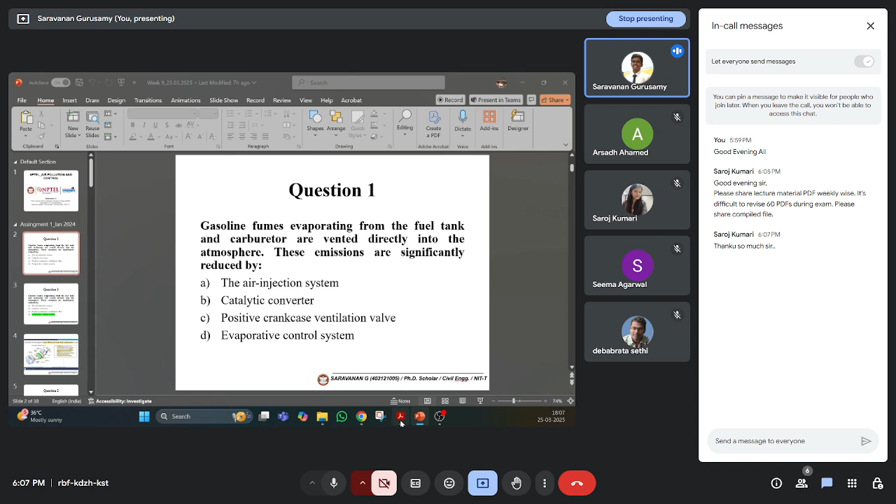So how to discuss this - air pollution control devices? I will just share the screen. Hope it's visible to you now. How to control air pollution?

Why is it called air pollution control, not air pollution treatment? Because air, it's a part of environmental engineering. In water and wastewater, we discuss treatment. But why is air pollution not treatment? Because the pollutants we discuss - carbon dioxide, carbon monoxide, nitrogen dioxide, sulfur dioxide - these are all part of air. So whenever a compound is part of something, we always try to control it; it will not be removed from the system. Once it is removed from the system, it is called treatment. Once the level is increased and we try to decrease it, that is called control.

We know air contains 78% nitrogen, 21% oxygen, and the remaining as trace gases. These trace gases contain CO2, CO, N2O, SO2 - everything - and N2 is already there at 78%. So if something increases above the limit reference level, we try to reduce it. That is called air pollution control - we are controlling it to the base level.

If something is present in excess that is not already an existing component, it needs to be removed from the system - like ozone, volatile organic compounds, or refrigerants, which we discussed last week. These are all non-existing air components that need to be removed - that is called treatment. But whenever talking about particulate matter, CO2, N2O - these need to be reduced, so that's called air pollution control. That's why this term air pollution control is very important.

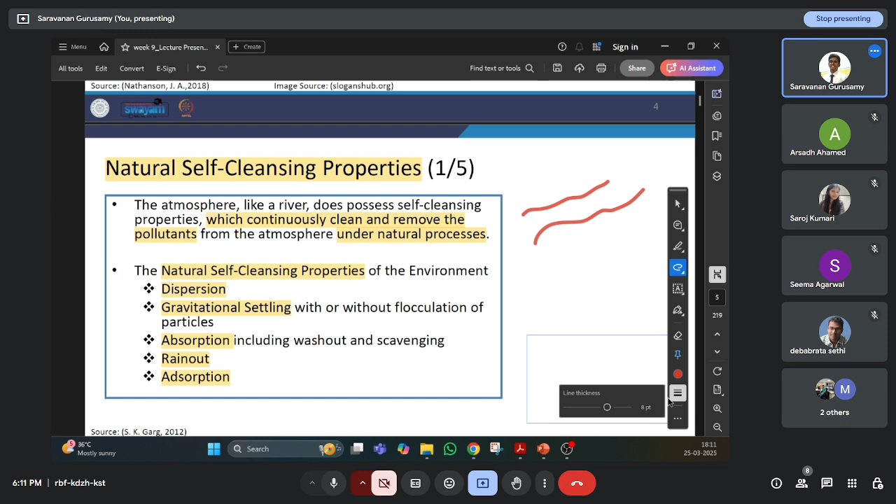Then there comes the natural self-cleansing mechanism. Consider a river - water is flowing, and an industry is discharging some effluent into the river. After some time, you can see the river becomes clean again. Why? Because of dispersion, dilution, adhesion - these mechanisms happening in flowing water reduce the pollutant concentration. That is called a self-cleansing mechanism, happening naturally because of the flow of the river.

The same thing happens with air, because air is flowing - it's also a fluid. It moves because of dilution, absorption, or gravitational settling. It may get dispersed, or settled due to gravity, or absorbed by water or liquid, or adsorbed onto solids, or rained out - because of rain it gets settled down. These are the five principal mechanisms by which pollutants in the atmosphere may get reduced naturally. That's called the natural self-cleansing property of air.

The first one is dispersion - dispersion of pollutant by wind, because whenever there is high wind, that creates a turbulent nature. We have discussed this in modeling also - there is a stable condition and an unstable condition.

Unstable condition is due to turbulence of wind. Whenever there is a high flow of wind, that will dilute all the concentration. If there is an industry emitting a pollutant, with proper wind it will be dispersed easily, and we won't find a high concentration of pollutant anywhere. But it does not remove the pollutant, that's the major thing. It will only disperse it, not remove it.

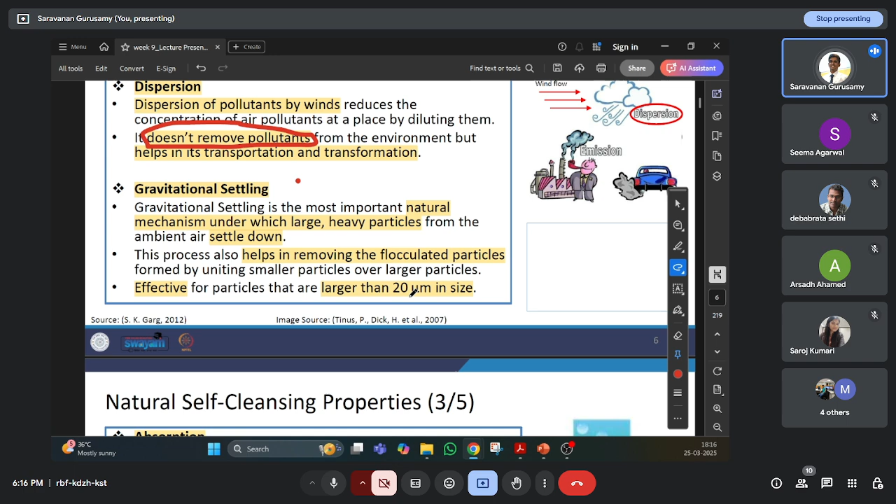Similarly, gravity settling happens whenever there is a particle of larger diameter, denser particles that will easily settle due to gravity. If you look at a desk or the floor, you may find particles deposited there due to gravity. That's called gravity settling. It effectively works when particle size is greater than 20 micrometers. Even 20 micron particles are considered larger particles, and they get settled easily.

Then absorption happens, as there are two principles we discussed earlier: absorption and adsorption. Absorption happens whenever a particle is mixed with a liquid. Adsorption happens whenever a particle gets adsorbed on the surface of a solid. Absorption happens with rain or mist, where a droplet of rain collects the dust particle in the air and it gets settled. This takes place below the cloud level. In clouds, there may be water droplet particles due to moisture; the particles mix with the liquid and settle down with the raindrops. This does not help in removing particles smaller than 1 micrometer in size.

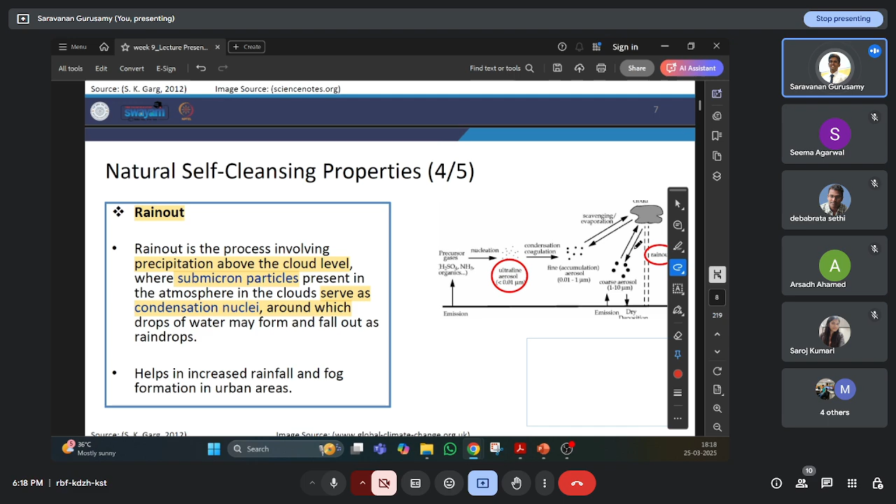Then rain out. Rain out happens involving precipitation above the cloud level, whereas absorption with mist or raindrop particles happens below cloud level. Rain out happens above the cloud level, where submicron particles present in the atmosphere in the cloud serve as a condensation nuclei, around which drops of water form and fall out as rain droplets. The particle gets surrounded by water particles through electrostatic attraction, called condensation nuclei, and then gets deposited as a raindrop.

Finally, adsorption, similar to absorption. Adsorption happens on the surface of a solid. It is kept attracted generally electrostatically by the surface due to charge, and then either by gravitational settling or by inertial impact it gets settled down.

So this is the natural cleansing strategy and their control devices. All the devices we use nowadays for air pollution control, we have learned from nature. Naturally there are mechanisms that we are adapting into mechanical devices. That's the principle behind it. So most control devices are based on the principle of this self-cleaning capacity.

Gravitational settlers, or settling chambers, are based on gravitational settling. Spray towers are based on the absorption principle. Wet scrubbers are techniques we will see, but the principle is adopted from nature. Use of activated carbon, silica gel, these are all based on adsorption, again the adsorption principle happening in nature. So these are all the principles we are using, adopted from nature.

So first, why do we need air pollution control? What's the objective? Prevention of nuisance, because there should not be a high concentration of pollutant in the atmosphere, and prevention of physical damage to property.

Elimination of health hazards, human health hazards. Then recovery of valuable waste products, because whatever particulate matter we are emitting may have some value. Whatever organic matter we are emitting into the atmosphere may have some value.

Then minimization of economic losses. As I mentioned, lots of tourism damage, visibility, and material damage to historically important areas - that will cause economic loss, like rubber. Even all the vehicle tires are getting affected due to air pollutants. So that is all economic loss to the country. Then improvement of product quality - these are all important objectives of air pollution control.

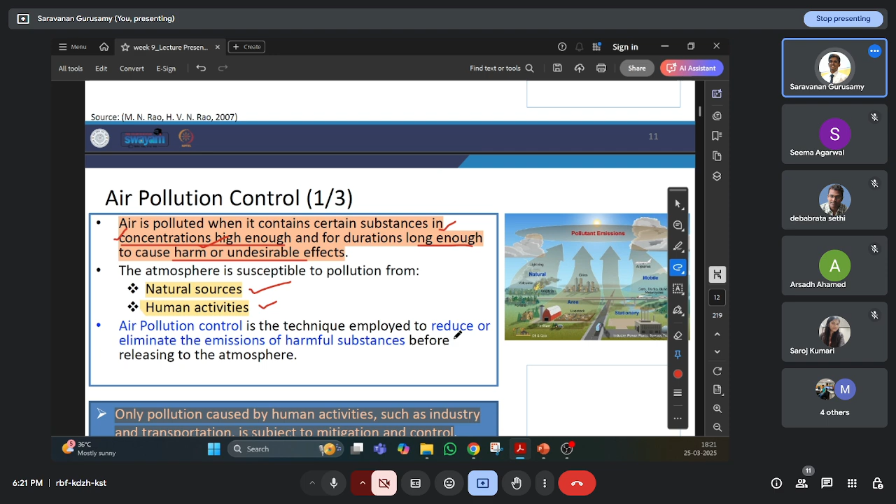So air pollution control is a technique to reduce or eliminate the emission of harmful substances before releasing to the atmosphere. This control is the strategy we need to adopt inside the industry or any source, before emitting into the atmosphere. If it gets emitted into the atmosphere, we can't do anything. So these are the two main principles: reduce before emission, control within the premises.

Only pollution caused by human activities such as industry and transportation is subjected to mitigation and control, because whatever is caused by nature can be self-cleansed by nature itself. So anthropogenic activity or anthropogenic sources need to be controlled.

So what are the pollutants we have to target to control? So primary focus is on criteria pollutants - there are 6 criteria pollutants which are prescribed in IS code also, I mean National Ambient Air Quality Standards, NAAQ standards. So that also prescribed 6 criteria pollutants.

First is particulate matter, both PM 2.5 and PM 10, based on size, aerodynamic particle diameter. Then carbon monoxide, sulfur dioxide, nitrogen dioxide, ozone, lead. These are the 6 criteria pollutants having proper standards, need to be within the standards.

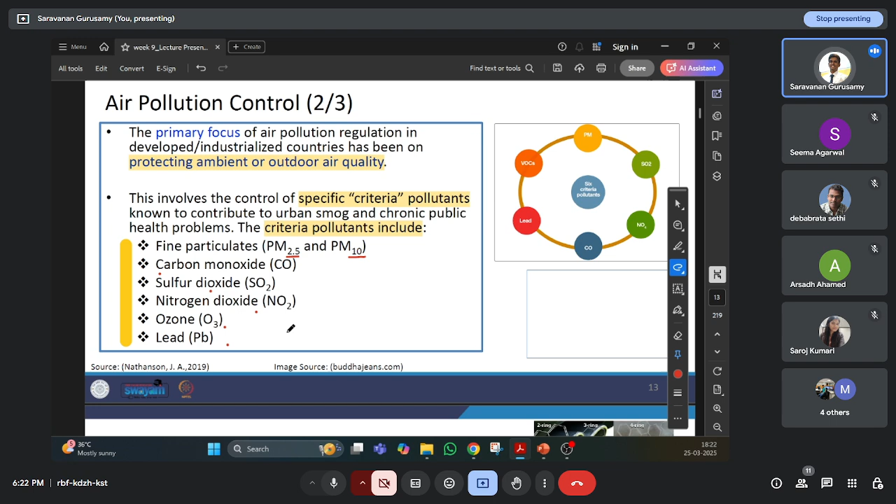Why are they called criteria pollutants? Because whenever this pollutant is present even in small quantity, it itself causes huge damage to people or health effects. So since the end of the 20th century, the hazardous effect of trace amounts of many other pollutants, called air toxins, became known - these are all man-made compounds. After the 20th century, we could see other than these 6, lots of air toxins getting emitted into the atmosphere, like organic chemicals.

So now we are discussing - we have a code for VOCs, volatile organic compounds, carbon, hydrogen, and other atoms that may form organic chemicals. Specific emission regulations have been implemented for this pollution also.

So how to control? As I mentioned, these 4 are viable: reduction at the source, reduction of pollution discharge at the source, dilution of source discharge, dispersion of source location. So these 4 are important. How to do this?

Reduction at the source is - once it is not getting generated, then no need to emit, right? So if you have a good technology - like I am having a vehicle that is very old and will emit lot of pollution to the atmosphere. So that is one. Another one is an e-vehicle that is not having any emission. So I am reducing at the source itself by buying an electrical vehicle. So that is reduction at the source.

Then reduction of pollution discharge at the source by control equipment. If I am having only a diesel vehicle or a petrol vehicle or a fuel vehicle, so for that I'm having a proper control system at the exhaust that may prevent the release of toxins into the atmosphere. That is called reduction at the pollution discharge itself.

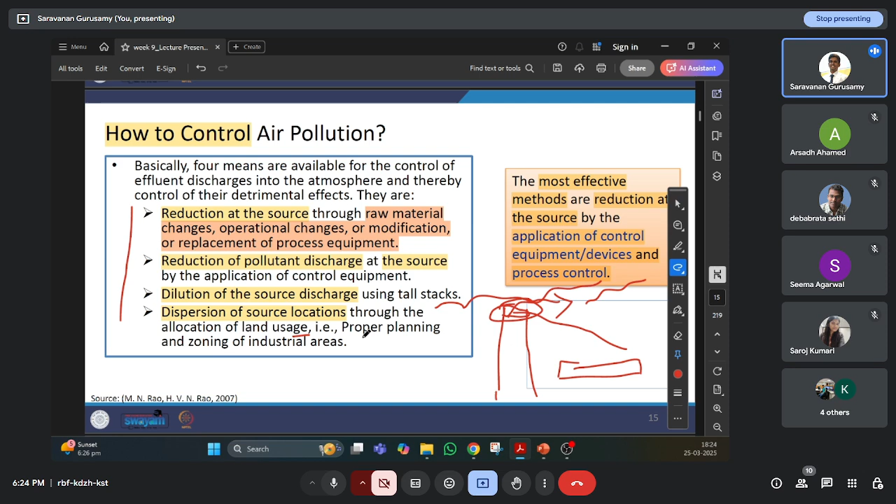These 4 need to be carried out before controlling, before thinking about air pollution control. So what are the devices or methods we can use? Emission can be reduced by changing to cleaner fuels and processes - from transportation or any industrial sector. Fuels are the reason for emissions, so cleaner fuels, that's what we call green chemistry. Green chemistry concepts are based on reducing waste or emission at the source itself.

Because those from environmental engineering background will know, for a simple COD test in water - chemical oxygen demand - we used to use lots of chemicals. For open reflux, how much chemical do we use? For closed reflux, how much time and chemicals do we use? So this process is getting changed. Nowadays sensors are there, and sensors don't require any chemicals. That's called cleaner production or cleaner green chemistry concepts. So if we shift industries' fuel concepts like this to cleaner fuels, there won't be emissions. That needs to be taken care of first.

Then if it can't be changed, emission control at the source needs to be addressed - collected and trapped by appropriate air cleansing devices for particulate matter control. There are two sources: stationary source and moving source. Moving sources are vehicles - cars, whatever exhaust we emit, that is called moving source. Stationary sources are industries, landfills - these are all called stationary source or area source. So how to control particulate matter from the stationary source?

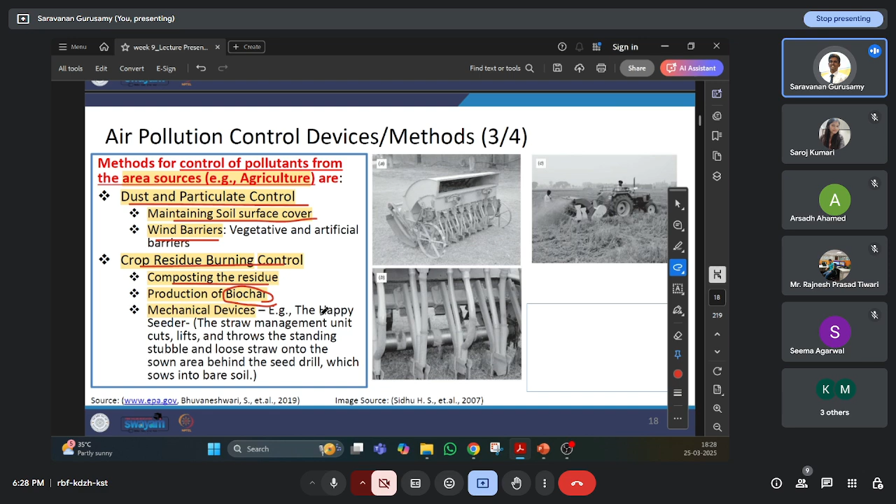Then production of biochar we can do - we can think about pyrolysis. Pyrolysis produces biochar in a controlled environment without oxygen at high temperature, but it is energy intensive, though we can get a product out of it. Then mechanical devices we can use like happy seeder, the straw management unit. There are lots of inventions now coming out to reduce crop residues or make value-added products from crop residues. So we need to think about control of pollutants in areas like agriculture.

Then forest fire, that is also considered an area source. How to control forest fire? It will emit lots of particulate matter, so firefighting reservoirs need to be there.

Spraying of fire retardants, forest fire monitoring towers need to be there, like watchdogs. And from a stationary source, as I mentioned, six equipments we are going to see.

Variety of physical processes, nothing is chemical here. Everything is physical because particulate matter involves no chemical reaction. Nothing will happen with the particulate matter. We have to settle or trap the particulate matter by size separation only.

So in air, there will be some particles. Air may pass through smaller holes, so we have to trap the particulate matter. That's the only physical method we can use.

If it is organic matter, nitrogen, or sulfur, then we have to think about chemical process. Particulate matter only requires physical process. Please remember this - particulate matter is a particle, a solid, so we can think about physical process.

So particulates adhere to each other, forming agglomerates. Whenever there is a bigger size of particle, it is easy to remove, easy to settle. We know that in a self-cleansing mechanism, particles greater than 20 micron in size directly settle on their own. So particles, when they adhere, cluster or agglomerates will be formed.

So first is settling chamber or cyclone collectors. All are discussed here in a single slide. Everything is discussed here for a stationary source.

For example, settling chambers and cyclone separators are used to control industrial dust emissions. As a pre-cleaner, we can use this type of settling chamber because these settling chambers and cyclone collectors are efficient for larger size particles only. So we can use them as a pre-cleansing technology.

Wet scrubbers are good for smaller particles, to control flammable, explosive dust or mist from sources. Wet scrubbers can also handle hot air streams and sticky particles.

Electrostatic precipitators, we can think about for power plants having minute particles. Coal power plant or thermal power plant will produce fine particle emissions in the flue gas. That needs to be controlled with the electrostatic precipitator, and fabric filters are also capable of handling fine particulate matter.

How to select these particulate collector devices? Based on the particle size, shape, density, and based on the particulate loading - how much quantity is there. For bigger quantity of larger size, we can think about gravity settling or cyclone separator.

For fine particles with lesser concentration, we can think about electrostatic precipitators or fabric filters, because we can't clean this type of fabric filter often. So that is also important.

Efficiency required - if only 90% removal is fine, then gravity settlers are fine. If 99.9% removal is required, think about electrostatic precipitator. Then properties of the carrier gas.

If it is hot gas, then we can't go with the fabric filter - it will burn. So that needs to be considered. What is the temperature of the gas? What is the pressure? What is the humidity?

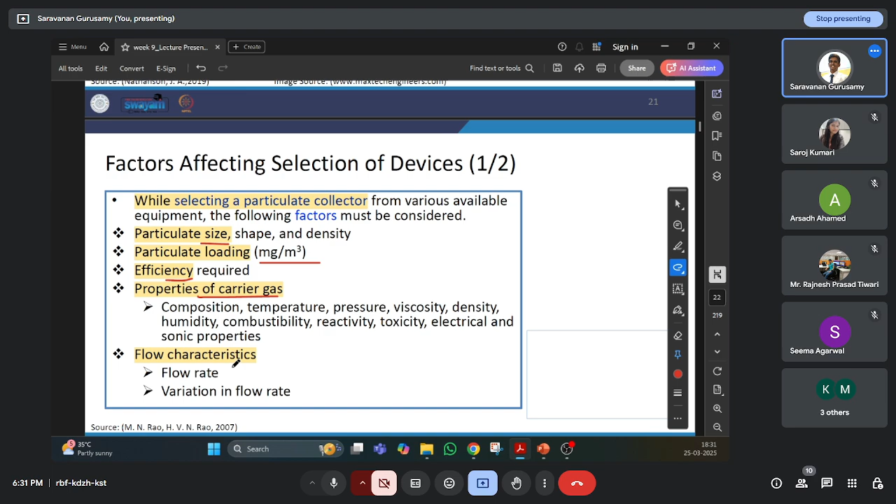If it is having water or moisture, then gravity settler will not work. So that and all needs to be taken care of. Then flow characteristics, flow rate, variation in the flow rate, specific properties of the contaminant.

Maybe the contaminant is toxic or corrosive, so we can't use a steel chamber that will get corroded. And allowable pressure drop - because in fabric filters it's flowing through minute pores, so pressure drop, pressure difference plays a major role. Then contaminant disposal after collection, what we are going to do.

If it is a wet scrubber, it will be taken with the water, so what to do with the water, how to treat that water with the pollutant. So contaminant disposal is a major factor. Capital and operating cost, ease of maintenance need to be thought about.

Then for gaseous criteria pollutants, we can think of three methods. First is for particulate matter, this is for gaseous pollutants like volatile organic compounds. Absorption, adsorption, incineration - these are the three techniques we can use for gaseous pollutants.

Techniques like singly or in combination of adsorption and incineration also we can think about. In coal mines, this type of extraction and utilization is used a lot. After production, lots of emission happens that needs to be taken care of with adsorption and incineration.

So fourth technique is called carbon sequestration. Nowadays lots of research is going on in carbon sequestration to reduce the carbon footprint. There is a 13th SDG goal, climate action - that is the main sustainable development goal.

Carbon sequestration comes under that. Whenever carbon is there in the atmosphere, it will really contribute to global warming, which we discussed last week.

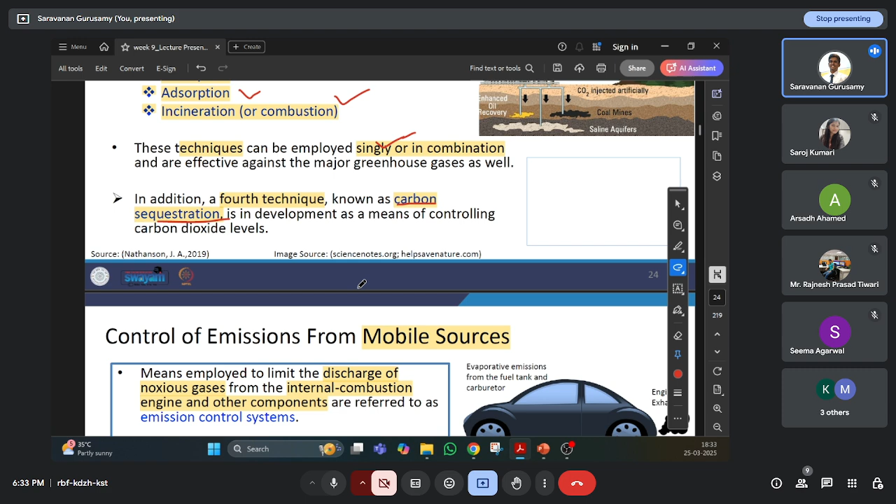So whenever carbon is sequestrated in solid form or contained in a system, there is no problem with global warming. That automatically reduces the temperature and the impact on the globe. So carbon sequestration is a major research topic nowadays.

For mobile sources, we can think about three main sources: engine exhaust, crankcase, and fuel tank and carburetor. These are the three emission sources, meaning the means employed to limit the discharge of noxious gas from internal combustion engines and other components. That's called the emission control system for mobile sources.

We have discussed the stationary source and the area source. Now mobile source. First is engine exhaust, right?

Engine exhaust may contain hydrocarbons because it's from petrol or diesel, so that may be directly converted into hydrocarbon. Nitrates, oxides of nitrogen and sulfates will come, so NOx, SOx will be there. Trace various acids, alcohols, and phenols may also happen.

Then crankcase. Crankcase is the housing of the crankshaft in the reciprocating internal combustion engine. Those from a mechanical background may know about the crankshaft. These are all engine components.

The crankcase is a secondary source of unburnt hydrocarbon. Whatever is burnt comes out through the exhaust; whatever is unburnt will be there as carbon monoxide. Whenever carbon is fully oxidized, you get carbon dioxide. Whenever there is a lack of oxygen, only CO will be formed - that is called incomplete combustion. With proper oxygen, carbon dioxide will form, which is good. So carbon monoxide is more harmful than carbon dioxide.

Then the fuel tank and carburetor - hydrocarbon continuously evaporates from the gasoline constituent, since it's a volatile substance. Diesel or any fuel is volatile, so it will continuously evaporate, forming gasoline constituents, and hydrocarbons will be there in gaseous form.

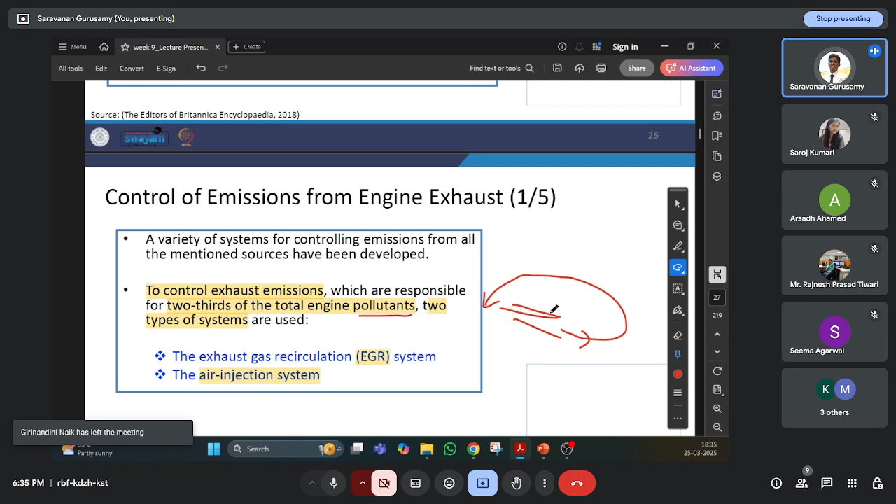One is exhaust gas recirculation, and the other is air injection system. Whatever gas coming out through the exhaust has good heat and may contain NOx, SOx, hydrocarbons - that needs to be sent back to be fully combusted and then sent out, so you get less pollutant output. That is called exhaust gas recirculation. Then the air injection system - air is injected for proper combustion. So these are the two systems we can follow.

For exhaust gas recirculation: there is an engine producing gas, and that gas needs to be recirculated again for full combustion before emitting into the atmosphere. A specific portion of exhaust gas is directed back to the cylinder head, which favors lower production of nitrogen oxides, because if it is fully oxidized, there won't be much emission.

Then the air injection system - secondary injection of air helps achieve full combustion by injecting air into the exhaust manifold. The air combines with unburnt hydrocarbon and unburnt carbon monoxide. Carbon monoxide at high temperature continues the combustion process, so CO2 will be released, not CO. These are the two control mechanisms for engine exhaust.

Another area of additional combustion control is the catalytic converter. What are catalysts? Catalysts are substances that boost a reaction but take part in it without reducing their own concentration - they go into the reaction and come out after the reaction. That's called a catalyst, and it boosts the reaction.

We need more oxygen or more oxidized product in the fuel, so we can use metal catalysts - hence the catalytic converter. It's a honeycomb structure coated with a thin layer of metals like platinum or palladium, which act as catalysts. These metals induce hydrocarbon, carbon monoxide, and nitrogen oxides to convert into water vapor, speeding up the combustion process.

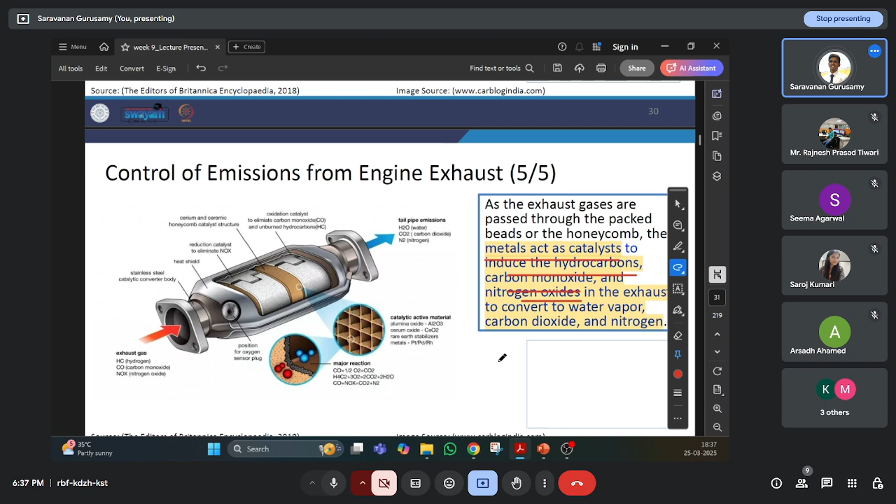With less oxygen itself, the reaction will speed up with high heat. But we can't give full heat, we can't give full oxygen. So with that limited purpose itself, a catalyst will help enhance the process. That's the use of catalyst. So metal catalysts can be used.

Then crankcase - first is exhaust, second is crankcase. That's the up and down part in the engine, so from there also some incomplete combustion products come out. That can be controlled by proper ventilating air and returned to the intake manifold. We need to add air, and the recirculation system will make it combust fully. So the positive crankcase ventilation valve, or PCV valve, can be used.

Earlier it was directly emitted into the atmosphere. Nowadays we have proper evaporative emission control systems in place with the fuel tank and also with carburetors, so that can be easily controlled. The fuel vapor is channeled through a purge valve, and the computer-controlled fuel injection system ensures a more precise air-fuel mixture, which is mixed and used for combustion, lowering the generation of pollutants.

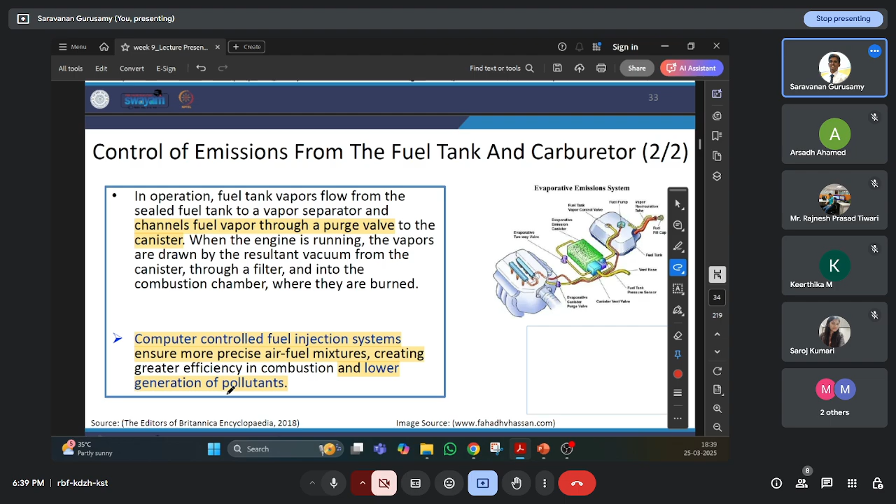So this gives you the proper idea about control of particulate matter from the stationary source, as well as from the moving source and the area source. Also volatile organic compounds may be emitted from the moving source - there are three emission pathways: one from the exhaust, one from the carburetor and fuel tank, and the third from the crankcase. Those devices are the control mechanisms we have discussed.

Selection of control mechanism is based on different factors, and the natural self-cleansing property is the base for this control system. We have adapted the principles from those natural cleansing properties.

Now we are going to discuss particulate matter control, or particulate pollutant control devices. The most effective method - this point will come in all the PPTs - is reduction at the source. So from an industry, we need equipment to remove or control the pollutant. We need to control at the source itself.

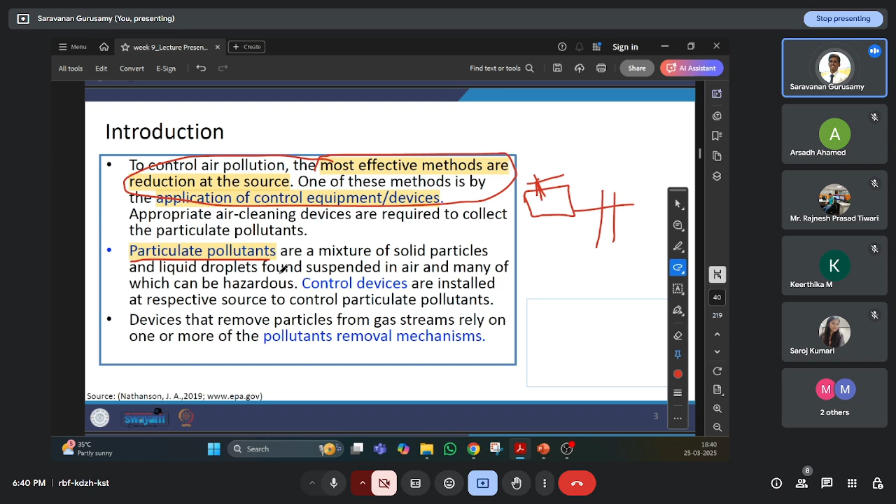Particulate matter is the main pollutant, a mixture of solid particles and liquid droplets, that can be controlled by different mechanisms. These are mechanisms, not devices - I'm discussing the mechanism behind those devices. First is gravity settling: as we know, a particle with higher density or higher mass will settle directly by gravity.

Second is centrifugal impaction. As you know, if you tie a stone to a thread and swing it in your hand, the stone will go around - that's due to centrifugal force. Whenever there is weight, it will always try to go around in a circular path. So we force the air to go in a circular path so that the higher-weight particles, like particulate matter, attach to the surface and only the air goes out. We are using the mass to remove the pollutant - mass will have a centrifugal impact.

The third one is direct interception. Whenever there is a barrier and air is flowing through it, the air may find a different path to go out, but particulate matter cannot find a different path - it will stick to that barrier. That is called impaction or interception, so direct interception may happen.

Then electrostatic attraction: whenever the particle has a charge and the barrier has an opposite charge, they get attracted. Subjected to the electrical field, the particle migrates to one of the surfaces of the device - this is called electrostatic attraction.

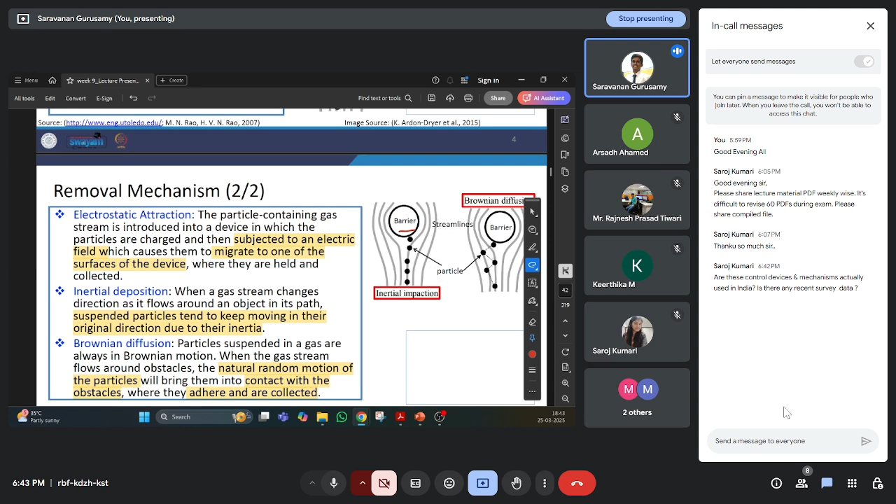Maybe some micro scale or mini scale industries operating in interior parts of SIPCOT may not have this type of facility, maybe having less fund or manual operating systems, so there we may not find this type of equipment. But major industries should follow - I mean all industries should follow, but major industries are using this kind of equipment.

So those are all the principles behind it. I am going to discuss about the equipment also. Hope I answered your question.

So we have discussed about gravity settling, centrifugal impaction, direct interception, and electrostatic attraction which is based on charge, and inertial deposition.

You all know every particle has an inertia, like what we experience in a bus - whenever the bus brakes, we move forward. So we are in a system moving in a path; whenever the system stops, all the particles will not stop. Everything has an inertia that keeps it in motion. So particulate matter in air may have the same inertia. Whenever there is a barrier, the air may go out, but the particles will intercept - inertially, it will impact and settle down.

Then Brownian motion - particles will always move in Brownian motion. This is a school level concept; we all know whenever particles are in a fluid, they will be in Brownian movement. That will cause the particulate matter to attach to the barrier. So we have to have a barrier to remove this type of particulate matter. These are all the principles or mechanisms behind it.

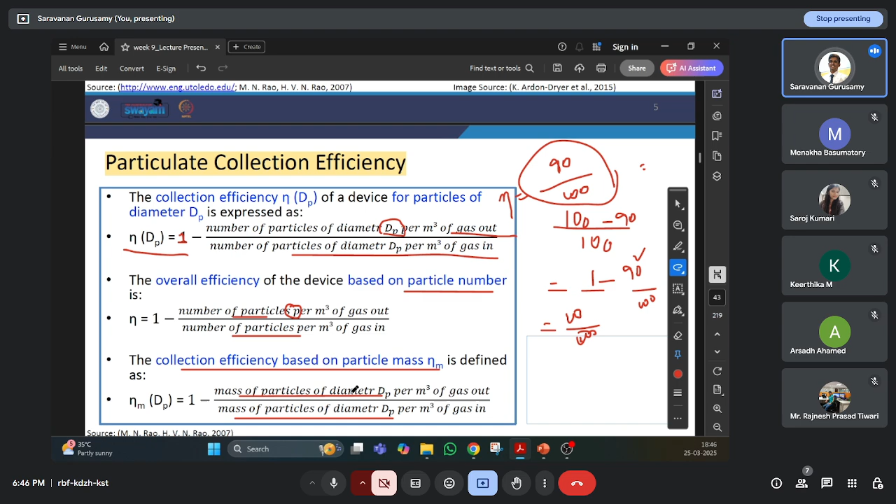So type of control systems - we'll discuss three here: settling chambers, inertial separator, cyclone separator. Next lecture we will discuss filters, electrostatic precipitators, and scrubbers or wet collectors. Six are the major particulate matter control devices. Settling chamber works with gravity, inertial separators work with the inertial principle, cyclones work with centrifugal force, filters work based on physical separation by barriers, and electrostatic precipitators work based on charge.

Scrubbers and wet collectors are based on state change, like water absorption. So particulate matter will get absorbed by the liquid particles. So these are the six principles and six devices.

First is settling chamber. So this is a simple type of equipment. Air is going in with a velocity slower than the settling velocity. Every particle will have a settling velocity. Those from civil background may know that if a solid is coming in water, it will get settled in the tank before leaving.

That's called a sedimentation tank or primary settling tank in environmental engineering. Water will be going in, and once it is flowing, the flow velocity should be less than the settling velocity. Settling velocity is given by Stokes law, Vs has a formula for settling velocity. We know the actual flow velocity, so flow velocity should be less than the settling velocity for the particle to get settled.

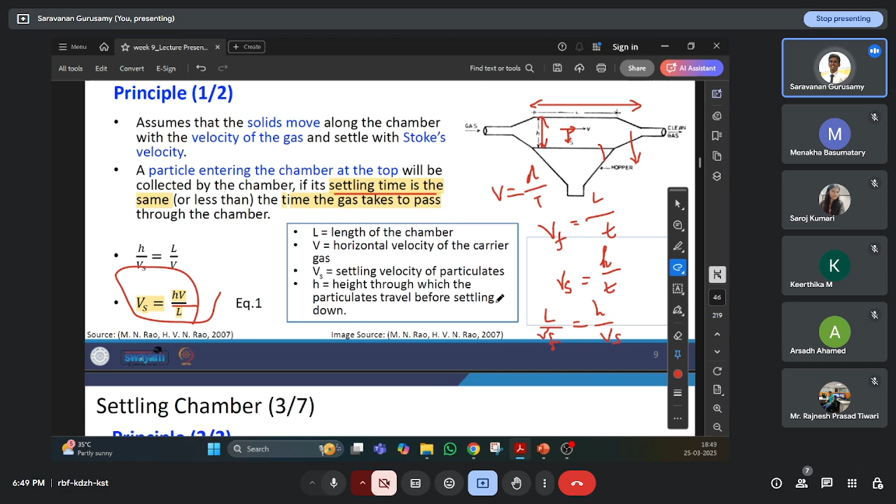So horizontal flow, this is vertical flow, that is the settling velocity. Settling velocity Vs equals Gd squared by 18 mu, times density of the particle and density of the fluid, which is the air. So the diameter of the particle you can find from this. D is the diameter, G is gravity, the acceleration due to gravity 9.81, and mu is the dynamic viscosity of the fluid. So you can find D from the settling velocity formula - this is the diameter of the particle that will get settled before the air gets out of the system.

So the minimum size of the particle that can be removed in the settling chamber you can find here - if it's flowing at this velocity or settling at this velocity, and given the length of the chamber, you may know my chamber will remove this particle size, this diameter. That's the formula behind it - it's a simple formula, Vs formula. If you know these values, you can find it all. Please study Stokes law.

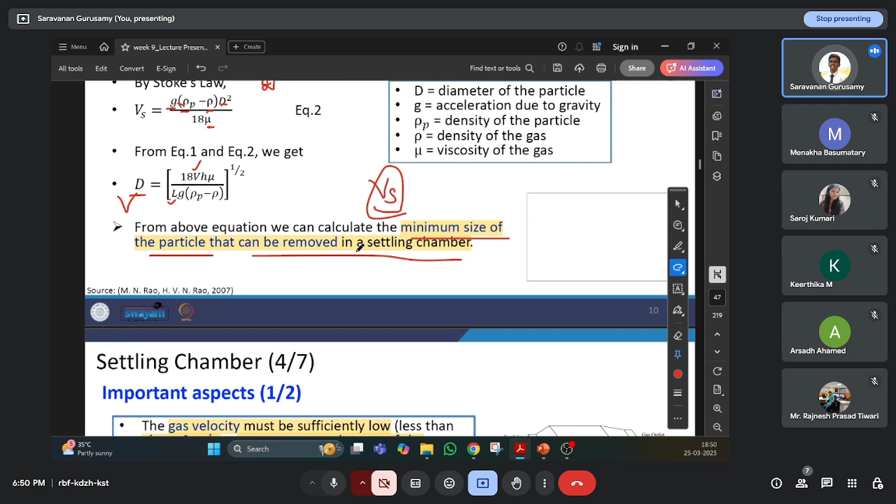That's in water, but the same can be adapted for air also. An important aspect is the gas velocity should always be lower than 3 meters per second to prevent re-entrainment of the settled particles. If it's higher than 3 meters per second, whatever particle gets settled, due to turbulence it will again come into the system. This is a main practical aspect - it should be less than 3 meters per second, and less than 0.5 meters per second is very good.

So to minimize turbulence, uniform velocity needs to be maintained, and pressure drop needs to be adjusted - it should be very small. Efficiency is improved by reducing the height traveled by the particle - that's why we call them tube settlers. If the gas goes through tubes, the height H will be much lower, and particles will get easily settled at the bottom. That's called a tube settler. Water treatment also nowadays uses tube settlers instead of a tank - the path will be more.

So easily it will get settled. That's what horizontal trays, shelves now they are using. The same principle is adapted for air also.

1 to 3 centimeter height intervals, and increasing the efficiency by increasing insertion of horizontal trays. If there are lots of horizontal trays, then air should go through this much distance, so L will be more. Particles will easily settle here, here, here - more pathways we can have to travel, so before that it will settle for sure.

Then minimal particle size we can remove is 10 micrometer.

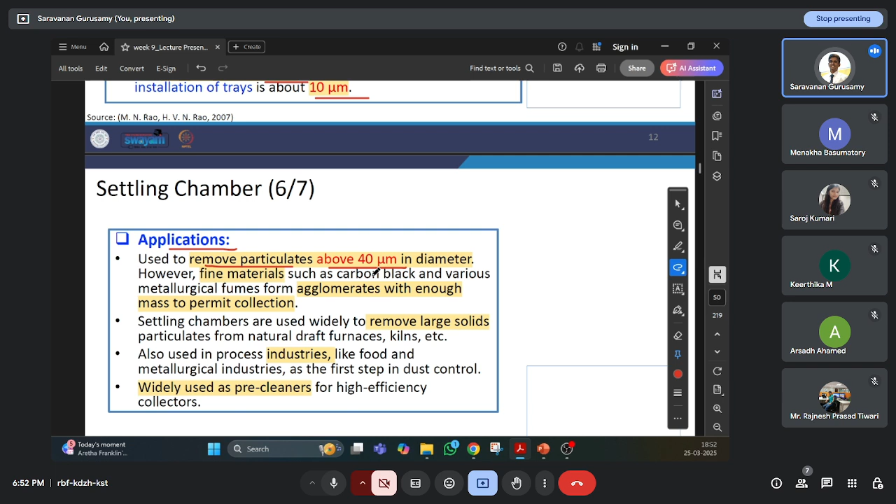What are the applications we can use for settling chambers? As you asked, you can see here. So the remove particle size above 40 micrometer. So wherever you can find 40 micrometer above particle, or else anywhere, you can use the settling chamber as a pre-treatment option. We first treat the 40 micrometer, then smaller particles we can use some other equipment that will reduce your cost and increase the efficiency.

Like remove larger solids from the draft furnace, kilns, cement kilns, or industries like food and metallurgical industries like steel manufacturing, or anywhere you can find these settling chambers.

First step is dust control. All the industries will follow this one. Dust control is very important, and it is widely used as a pre-cleaner. As I mentioned, we can use it as a pre-treatment option before any other equipment.

The advantages: low cost, simple, low maintenance, low pressure drop, dry. There is no need of water here, and it's easy to construct. Temperature is not a problem here.

Disadvantages: it will take larger space because it's a big equipment, and relatively low particulate matter collection. As I mentioned, only above 40 micrometer can be removed, and the efficiency is only 90% or 80% or 85%. It's a very low efficiency.

Then trays in multiple tray settling chambers may warp during high temperature. So if you are increasing the efficiency by increasing lots of trays, it will warp due to high temperature, so it will stick together. That's the problem here.

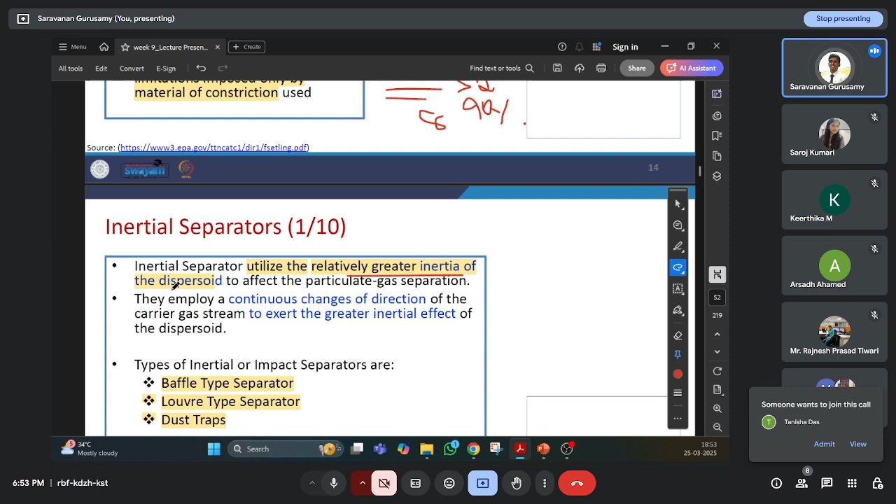Inertial separator is the second one. As I mentioned, inertial separator works based on the property of inertia - relatively greater inertia of the dispersoid to affect the particulate gas separation. That is of three types: Baffle type separator, Louvre type separator, and dust traps. The principle is greater inertia of the dispersoid is utilized.

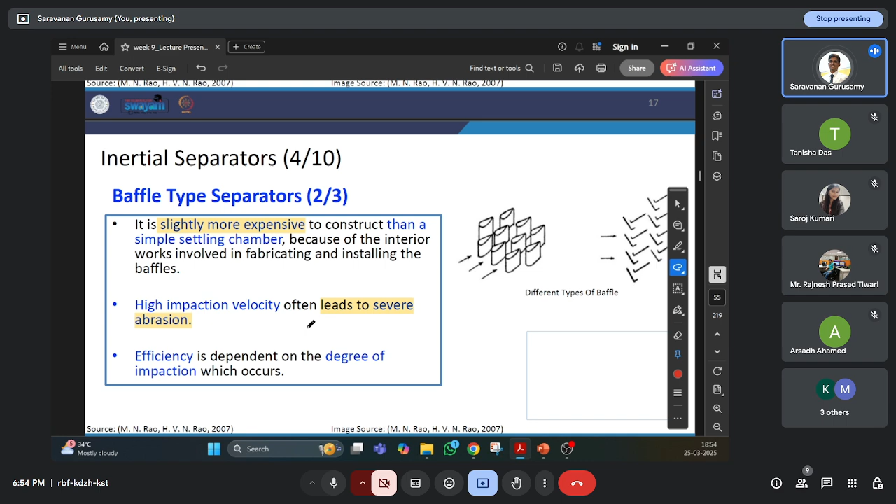Then it's slightly more expensive because we need to construct lots of baffles, lots of shapes, and it leads to severe abrasion because air will get stuck here, causing erosion of the material. So it's based on the number of baffles, length of the baffle, spacing, and configuration of the baffles - these play a major role here.

So gas will come in here and it will move a longer distance to go out, because particles will always settle down, but gas will always move up. Water will flow down, gas will flow up, and solids will go down - due to gravity, got it?

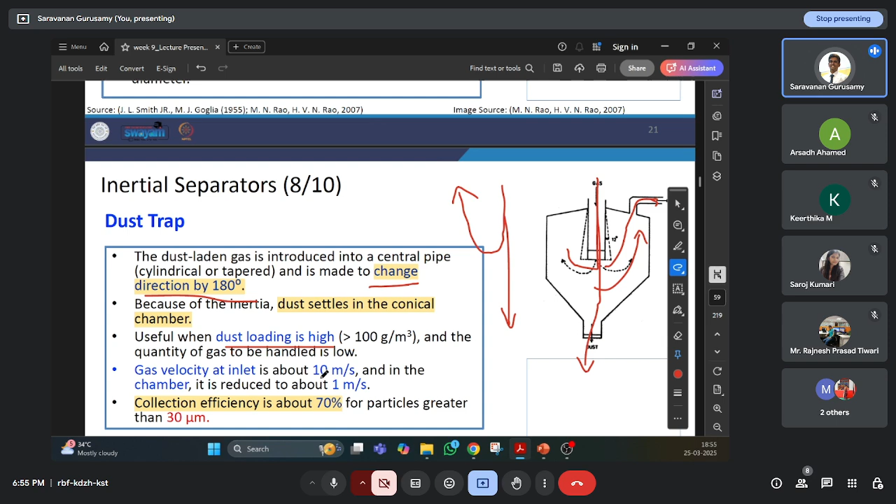So the change in direction is 180 degrees - flow is coming and it's taking a U-turn to go out, but the particle will not take a U-turn. The particle will take a straight path and settle down. So it's the simple principle of inertia. So dust loading is higher - if it is higher dust loading concentration, we can use this type of dust traps.

Power plant rotary cleaners, pre-cleaner, we can use this. Cyclone separators, the second method. First is gravity settlers, second is inertial settlers, third is cyclone separators.

Mass of the particle plays a major role, because centrifugal force is based on Fc equal to mass into acceleration, that's Newton's second law. So force of centrifugal will be mass of the particle, then acceleration will be velocity by time, so Vi squared by R. R will be the radius of the circular cyclone, and V will be the initial inlet gas velocity.

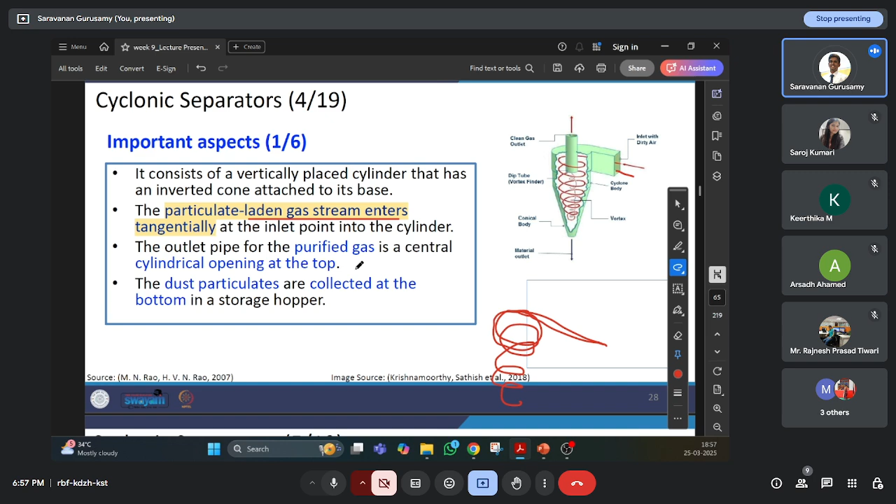In the cyclone separator, the dust-laden gas stream enters tangentially. It's tangent to the circle - if it's a straight line, it's called a tangent line. So it enters into the tangent path and flows into a circular cylindrical opening. It enters, and dust is collected at the bottom of the storage hopper. The gas will go out.

So it's a double vortex - the gas path will be a double vortex and a spiral downward, moving upward. So the gas flows upward, but the particle moves downward, dropping by gravity.

You can find 90% efficiency for a 10 micrometer particle, and 95% efficiency for a 20 micrometer particle. It can be operated at high temperature, and even at high atmospheric pressure. Gas volume we can handle is up to 0.85 to 700 meter cube per minute flow rate. A 15% gas leak can bring down the efficiency to virtually zero.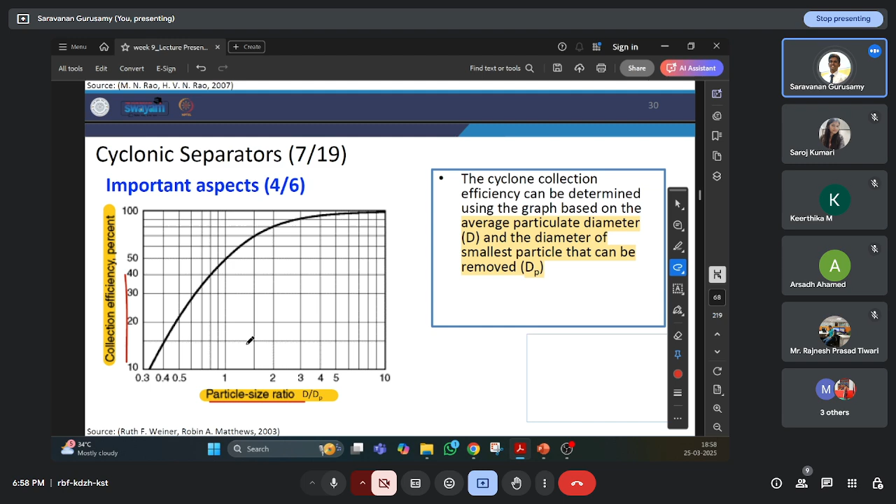That's important - gas leakage should not be there. This can be measured by a graph of particle size versus collection efficiency. The higher the particle size, the higher the efficiency.

So how to increase the efficiency? By dust particle size, inlet loading, and cyclone body - if these increase, collection efficiency will also increase. But whenever gas viscosity or cyclone diameter increases, the collection efficiency decreases.

These are the factors that need to be considered: inlet area, inlet width - these need to be very small. There are two types: conventional and high efficiency cyclone separators. Particle size greater than 40 microns can have up to 99% removal efficiency.

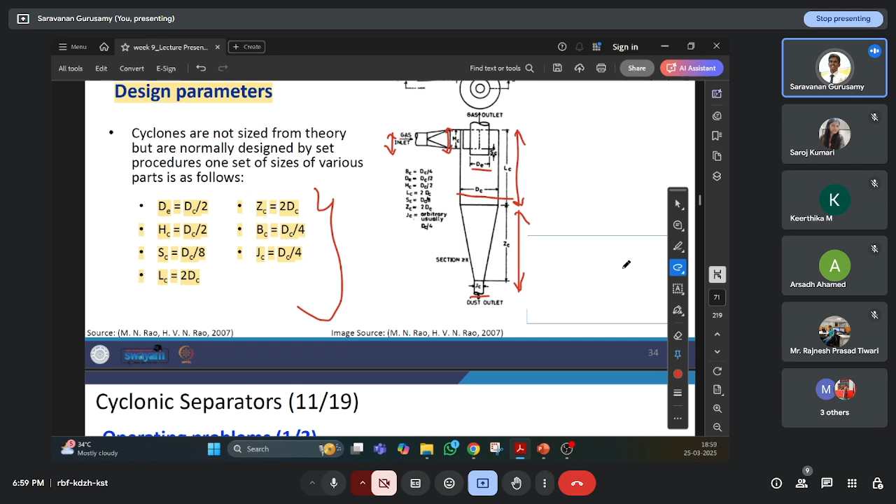Design parameters: gas inlet, each dimension matters, like exit diameter, chamber diameter, the dust particle outlet diameter, length of the centrifugal chamber, collection chamber depth, inlet depth, and inlet height. Everything can be calculated by these formulas that can be adapted. These are all design aspects.

Three important problems are erosion, corrosion, and material buildup. As mentioned, the particle will stick to the surface of the chamber, so there may be corrosion, there may be material buildup that needs to be scraped. Erosion occurs when heavy, hard particles hit the surface.

Corrosion happens if there is condensation, because sulfate, if present, reacts with moisture - SO2 plus H2O forms H2SO4. The same happens with NO2 forming HNO3. These are all acids, so they will corrode. Whenever there is moisture in the air, that's a problem.

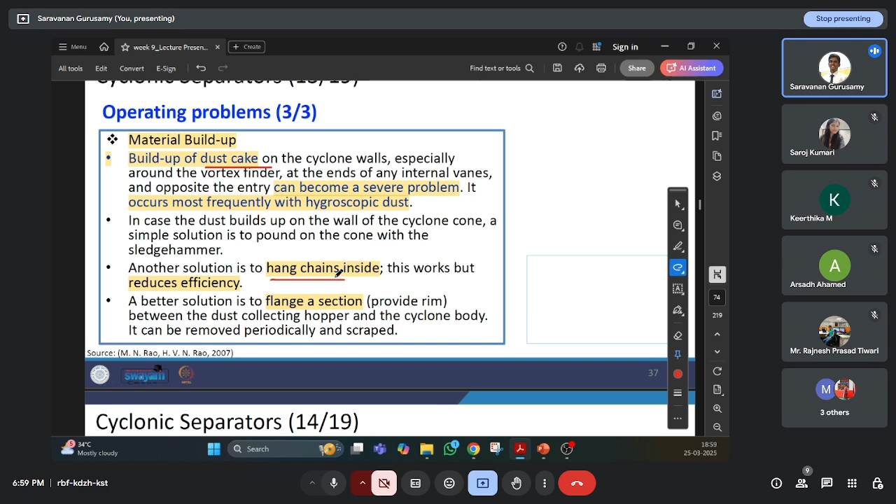Then material buildup - dust cake may form that needs to be removed by hanging a chain, but again, this will reduce the efficiency. All these need to be taken care of.

Applications - this answers madam's question. Control of gas from cement manufacturing industries, mineral processing, paper and textile industries - they use this type of cyclonic separators. We can also use catalytic dust in the petroleum industries, which will also increase the efficiency.

Multiple cyclones in series can be used, not just one. A cyclone chamber as a whole can act as a bag, or multiple cyclones - smaller cyclones operating in parallel - can be used, and this will add up to the efficiency.

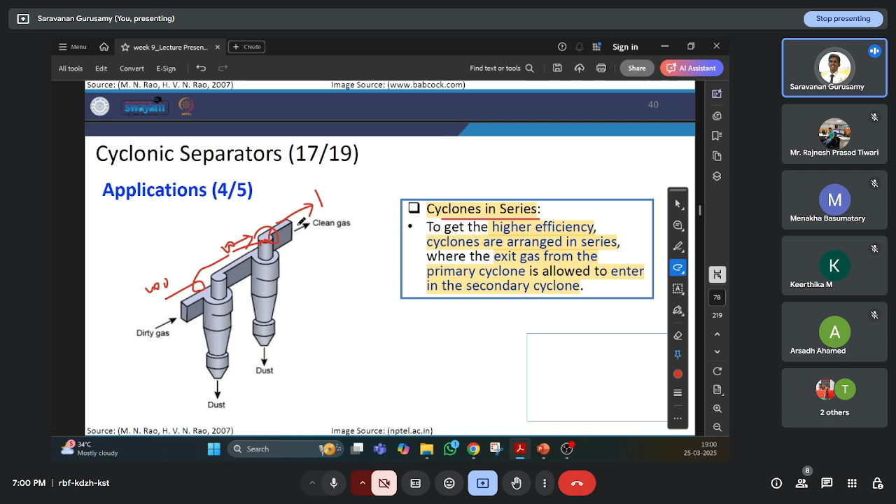If more volume of gas is there, we can adopt more cyclone chambers in parallel. But cyclones in series are required when the first one removes 90%, then 10% goes in. Out of this, 90% will be removed in the second, so only one will come out. So 100 will go, 90 will be removed initially, 90 removed, 10 will go, 9 will be removed and 1 will come out. This is in series. If you want to increase efficiency, follow series. If you want to handle a huge amount of air, think about parallel. So series has one efficiency and parallel has a different efficiency.

So settling chambers, inertial separators, and cyclone separators are the three used for coarse particle removal. In the third lecture we are going to discuss fabric filters, electrostatic precipitators, and scrubbers. These are all again for particulate matter. All six are for particulate matter only.

Again the same principle. Fabric filter is simply like a bag, a cloth bag. Whenever air goes in, think of whenever you are washing your bag - what will you find? Water will come out, forming a huge bag kind of structure. So particles will settle inside, and only water or air will come out. That's called fabric filters, having minute pores like a filter paper, so it will filter it. Only the gas will go out.

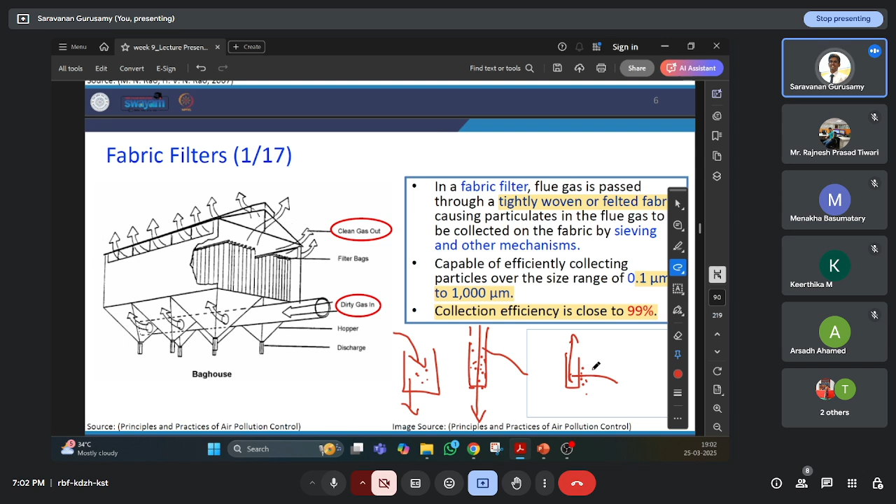Particles will be settled inside, or the air will be sent from outside to inside - particles settle outside, air goes inside. So these two principles we can use: flow from inside to outside, or outside to inside. Two mechanisms we can follow, and the back side we can use for cleaning.

You can use fabric filters for particles from 0.1 micrometer to 1000 micrometer, with an efficiency of 99%. That's a good thing with fabric filters. Removal efficiency increases when there is pressure drop. So whenever there is a pressure drop, removal efficiency will increase. Pressure drop occurs owing to the fabric, and also owing to caked and adhered particles. Pressure drop will increase whenever the efficiency gets reduced. So there are two pressure drops - one due to the fabric, one due to the cake. Cake is the particles that get agglomerated on it.

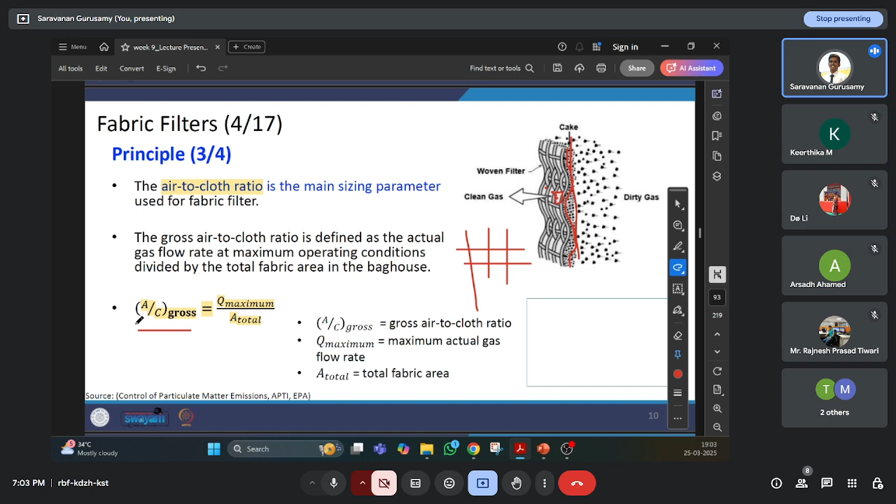So for delta PC, you can use a formula to find this out. The principle is the air-to-cloth ratio. This is a woven fabric, woven like a cloth - how we stitch cloth, there will be pores in between the threads. That is used to let the gas out while particles settle on the other side. That's called a cake - formed from particles, while gas passes through. So how much area is available for the air to go out compared to the total area of the cloth gives the air-to-cloth gross ratio. Q maximum by A total gives you the A by C ratio. The net area can also be used to find the net ratio.

The principle is impaction - whenever the particle comes with the fabric, it gets impacted. Or Brownian motion, whenever the particle moves in a zigzag, it gets impacted. Or based on the fabric having a negative charge, particles may get absorbed. So 99% efficiency, but particle size plays a major role. From 1 to 1000 micrometer particles, it is effective. For 0.1 to 1 micrometer, there is a drop in efficiency - only 75% efficiency is there. That's the problem, and cleaning is again a major issue.

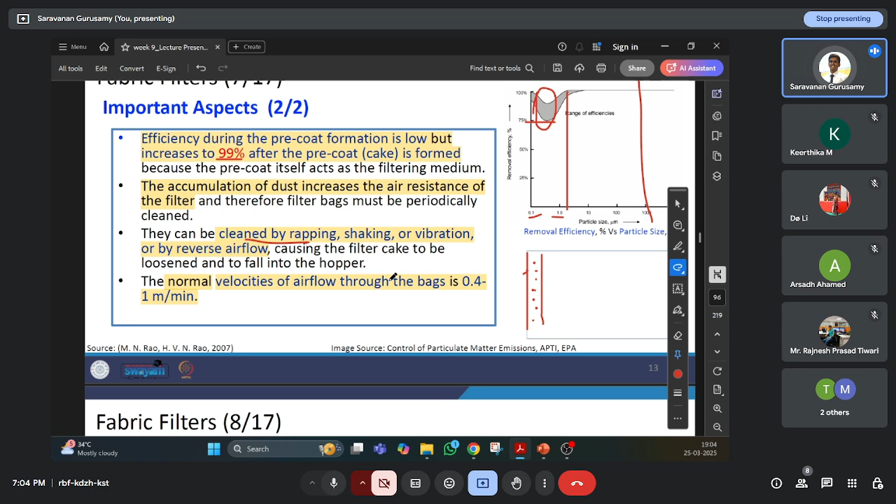Whatever cake is formed on the other side of the fabric can be rapped, shaken, or vibrated to remove it. Rapping is done using a rapper. Normal velocity of airflow through bags is 0.4 to 1 meter per minute - that's the flow rate. Efficiency of the bag may decrease by excessive filter ratio and improper selection of filter media - what material you are going to use. Improper selection of filter media reduces efficiency, and cleaning is another operating parameter. As I mentioned, rupture of the fabric can occur whenever there is acidic gas or moisture in the inlet gas, which will rupture the fabric. Temperature should be kept low, because the fabric may get fired otherwise.

Bleeding is when dust may come out along with the effluent gas. Whenever the fabric gets thin or there is a hole in the fabric, dust particles may come out. That's the problem.

Humidity and moisture can make the fabric hygroscopic, and there is also possibility of chemical attack, like sulfur dioxide and nitrous oxide. That is again a problem.

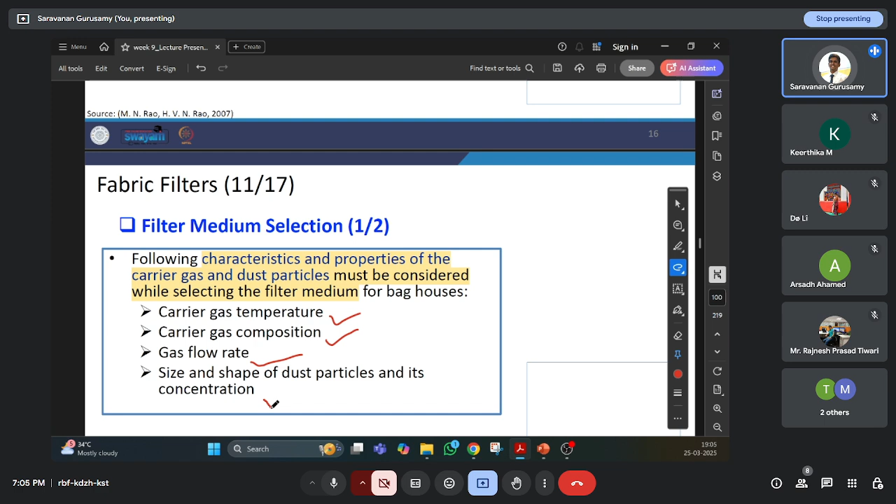So filter media will be selected based on the gas temperature, composition, gas flow rate, and size and shape of the particles. Based on that, we can weave the fabrics, so how much size it needs to be given to let particles through or not.

These are the different fabrics we can take: cotton, wool, nylon, and polypropylene. Plastics also we can use, and fiberglass as a material, because fiberglass can have a smaller pore size. We'll find minute pores, but it will not get ruptured. It has good strength and properties.

Selection is based on acid resistance, alkali resistance, flux, abrasion resistance, and tensile strength. Strength also plays a major role because high pressure needs to be taken care of.

Fiberglass has good and fair acid attack resistance and good strength. See, 14,000 is the strength. Strength is good for glass fiber; we use glass fibers for concrete also. But acid attack resistance efficiency is very less.

If you think about polypropylene as a plastic, acid attack resistance will be good, and it is excellent for flux ratio also. But plastic will not handle higher temperature. For that, Dacron can be used for handling higher temperature.

So, what is your industry's requirement? You can think about which fabric you can take for fabric filters.

Then there's the envelope type fabric filter, the multi-compartment type bag house. It's the same as parallel cyclone separators -- you can add fabric filters in series or in a row. So there will be a huge compartment, each bag will be hanged. You can see here, this is a compartment with different bags. This whole thing is called a bag house.

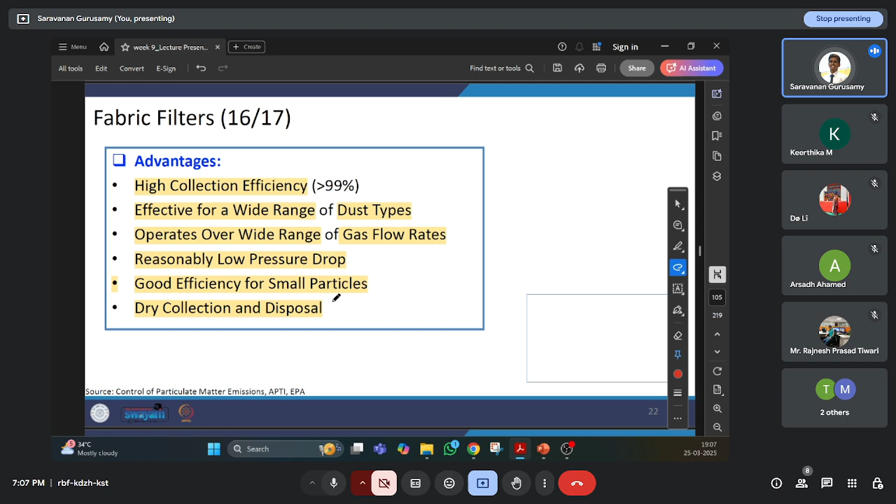We can use a gravity settler as a pre-cleanser, then use this type of fabric filter. Good efficiency is the major thing for smaller particles and dry collection and disposal. But the problem is the operating limit, so we need proper pre-treatment. It requires a dry environment.

Then electrostatic precipitators. Electrostatic precipitators work on the principle of electrostatic attraction. I will explain with a smaller diagram. There are plates, and the plates are getting charged with positive charges. There is a steel rod or any rod at the center that discharges negative charge.

I'm showing the side view. The air is going through this way, each side wave path. Whenever the air is pure, it will not get charged.

Whenever the air has particulate matter, the particulate matter will absorb this corona discharge -- that's called a corona discharge. Whenever there is a surplus of negative charge getting discharged, that's the corona discharge. That will be attracted by the particulate matter, and the particulate matter will get this negative charge. Once the particulate matter gets negative charge, since the plates already have positive charge, it will get attracted toward that, and the particulate matter will get deposited there. Whenever there is no charge, the particles will get deposited at the bottom.

So this is the principle of electrostatic precipitators -- it's getting precipitated, that's why it's called a precipitator. There is no water here, but it is getting concentrated. That's why it's called an electrostatic precipitator.

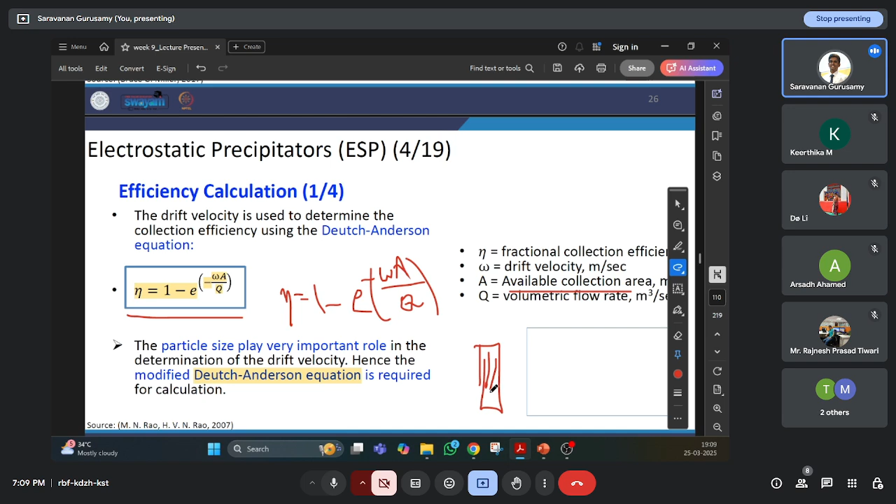So A will be the available collection area, that's the plate area, the sides I'm talking about. So the whole thing will be charged with positives, right? This equation is called the Deutch-Anderson equation.

And the modified version is the same, you can use it with wi, that's the drift velocity with the ith particle size. The overall efficiency can be calculated with this equation, that's 1 minus e power minus omega. Again, here the problem is with 0.1 to 10 micrometer particles.

Above 10 micrometers, it's very easy to remove, having 100% efficiency. But very high efficiency above 1 micrometer particle. Increased efficient charging causes collection efficiency to increase for particles, but there is difficulty controlling 0.1 to 1 micrometer particles due to both charging mechanisms.

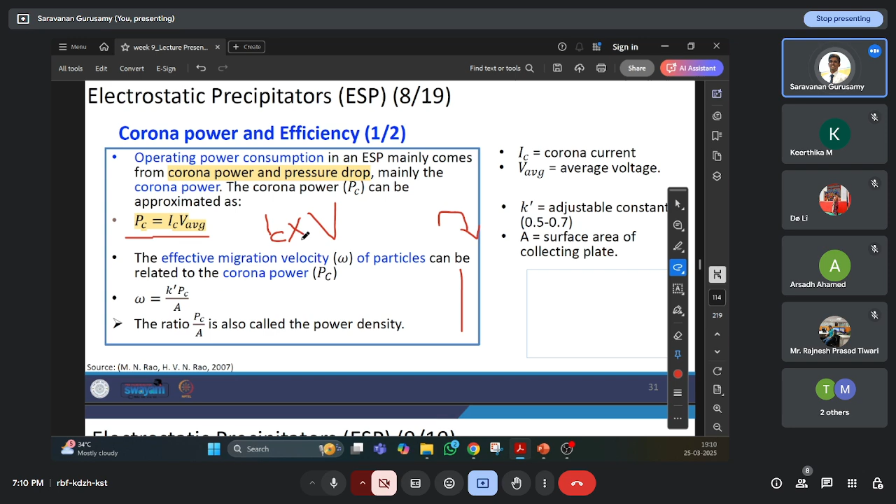That's called the corona power. How much power is required? Because we need to supply it to the electrode and also to the rods, right? So corona power and pressure drop can be calculated. Power can be calculated with this equation: current into voltage gives you the power. So corona current and average voltage - here you can see 98.5% effective collection efficiency can be achieved with different corona power ratios.

So different potential, higher potential difference will cause higher collection efficiency.

So there are two principles here: one is dry ESP, another is wet ESP. How to collect the particle that gets attracted to the plates? Whenever there is no charge, the particles settled on the plates can be removed dry or can be washed. These two principles are called dry ESP and wet ESP. Whatever we are using, we can classify it as dry ESP or wet ESP based on that.

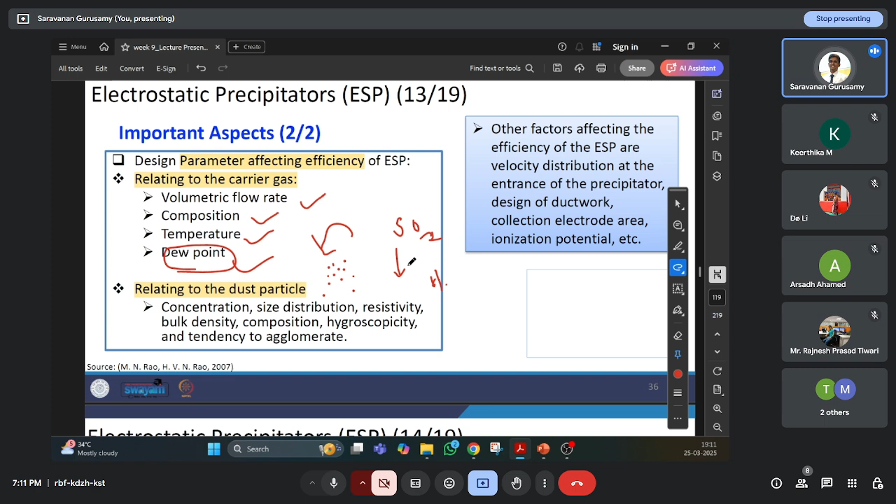So here collection efficiency is 99%, that's good efficiency. The parameters affecting this are volumetric flow rate, composition, temperature, and dew point. Dew point is the point at which the gas will convert into a droplet or liquid. That is a major thing, because whenever sulfur dioxide is present and the temperature is very low, it will convert into liquid and form acid. So relating to dust particles, concentration, size distribution, all that matters.

So whenever there is a particle with acid mist along with water droplets, electrostatic precipitators can be very useful. Or you can call this an ionizer. Ionizer is the other name for electrostatic precipitator, ionizer.

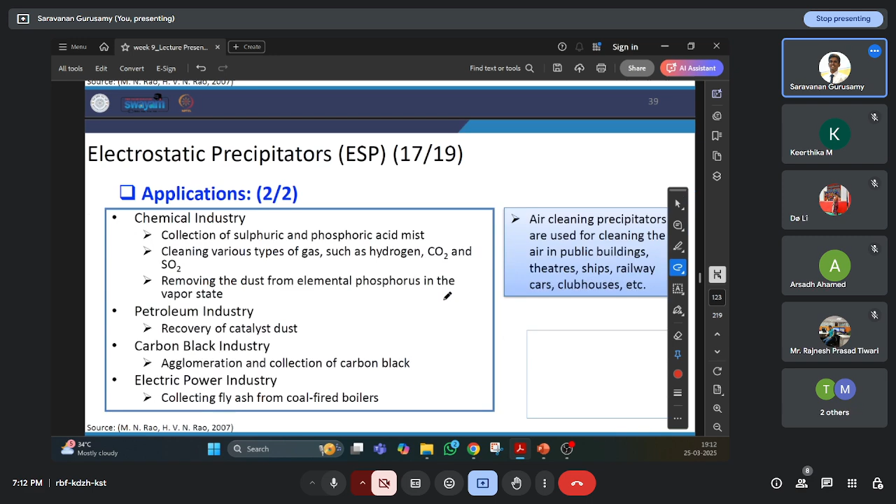I think this question was asked in today's assignment. So the advantage is high efficiency - particles smaller than 0.1 micrometer can also be removed. Higher initial cost, because there is cost required for electrical discharge, and poisonous gas and ozone may be produced due to ionization, because the charge may produce compounds in the air. That is another problem. Possible explosion may also happen.

Then wet scrubber. Wet scrubbers are the ones which use water to remove particulate matter. You all know after rain you get good visibility - why? Because whatever dust is in the air gets removed by the rain droplets. That's why we can see clear vision after rain. The same principle we can adapt for wet scrubbers.

Water is sprayed above the gas, which collects all the particles in the gas and settles down, because water flows from top to bottom while gas flows from bottom to top. So gas comes out, and water comes out with the particles. Wastewater has to be treated - that's the only problem here. We generate wastewater with particles, which can be easily settled again using the same principle of Stokes law. Greater inertial force - again the principle is inertia only, the particle should go into the water molecule.

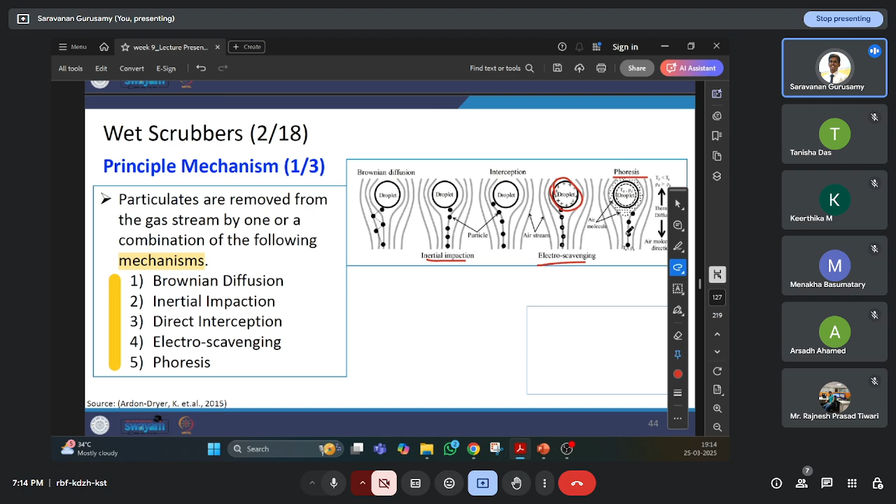That's the inertia only. Whenever there is a contact, then only it will get absorbed - absorption principle only. So Brownian movement, inertial impaction, electrostatic, because particle droplet may have energy, and phoresis, again the droplet may be having a particle size that will get attracted. These are the five mechanisms behind the absorption principle.

So there are different types of wet scrubbers: spray towers, venturi scrubbers, cyclone scrubbers, packed scrubbers, mechanical scrubbers. Scrubber in the sense using water to remove the particles.

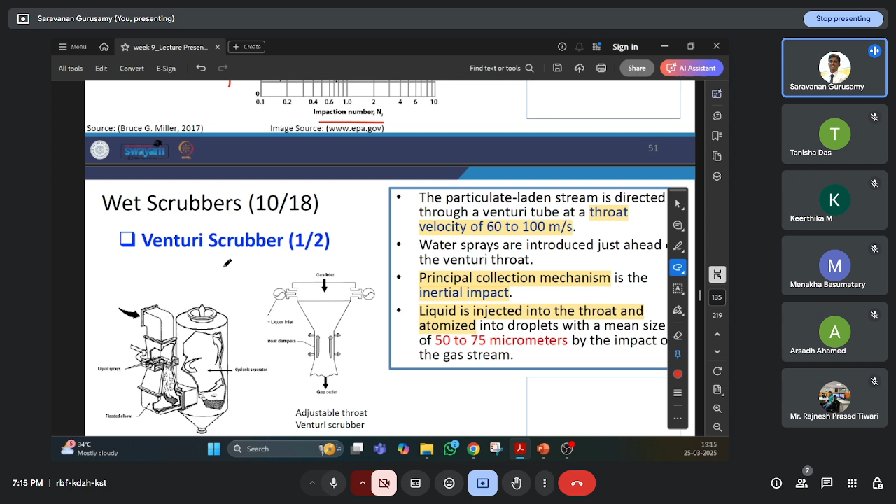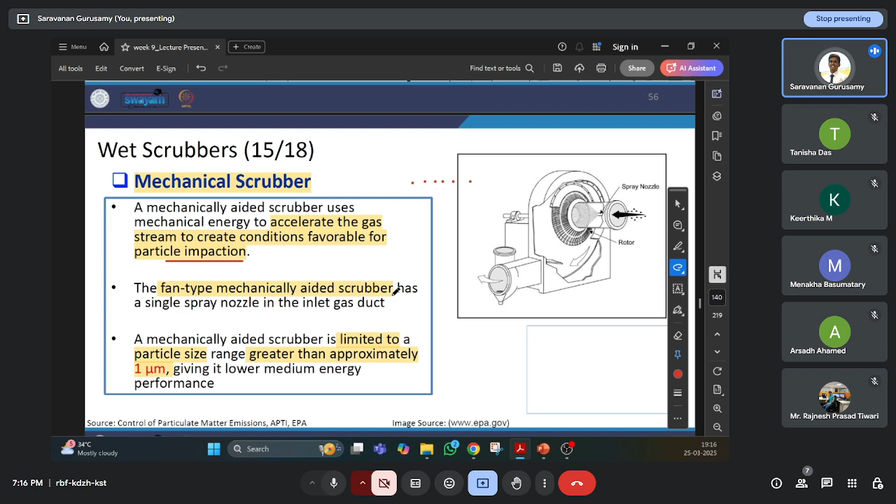And then mechanical scrubbers. Mechanical scrubber uses, you can see, accelerate the gas stream to create conditions favorable for the particle impaction. Above and all, there is no automation for making the particle contact with these droplets, but here we are making the condition favorable for the particles to impact with the water droplets. So the fan type mechanical aided scrubbers are used to take out these particles. So even 1 micrometer particle can also be effectively removed.

So here the main advantage is, along with the particulate matter, other gaseous pollutants like sulfates, nitrates, and even volatile organic compounds can also be mixed with the water, and that can be removed along with the wastewater. So that's the advantage with other particulate matter control equipment with the wet scrubbers.

But the disadvantage is effluent liquid. What can we do with the wastewater? We need a wastewater treatment plant. So we are just converting the pollutant type from air to water - we have converted, they didn't remove it. So that's the problem here. The waste product collected has high potential for corrosion problem. That is the problem, because water is there, easily sulfur dioxide, sulfuric acid, nitric acid will form.

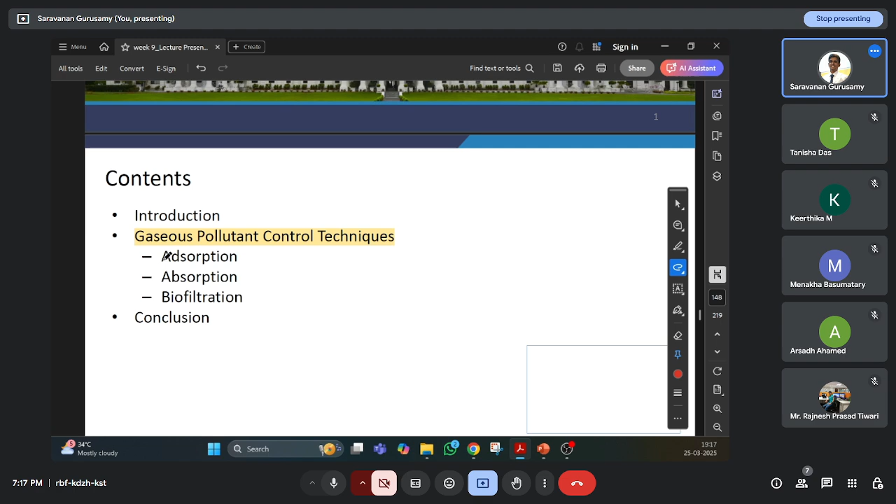Then we are going to discuss about the gaseous pollutant control equipment. As of now, we have discussed about the particulate matter control equipment. Now, gaseous pollutant control equipment, I'll finish in 10 minutes here. So we'll discuss the old assignment later. I thought this will be very useful. This is a major part of our course, so I am taking more time in this air pollution control equipments.

So as of now, we have seen about the particulate matter control equipments: one is gravity settler, second one is impact settlers, third one is cyclone separator, fourth one is electrostatic precipitator, fifth one is what we see now, filter bags, the sixth one is the last one, wet scrubbers. So six devices used for controlling the particulate matter.

Now the gaseous pollutants like volatile organic compounds, NO2, SO2 can be removed by three major principles: adsorption, absorption, biofiltration. And also we can use oxidation and condensation as chemical treatment methods.

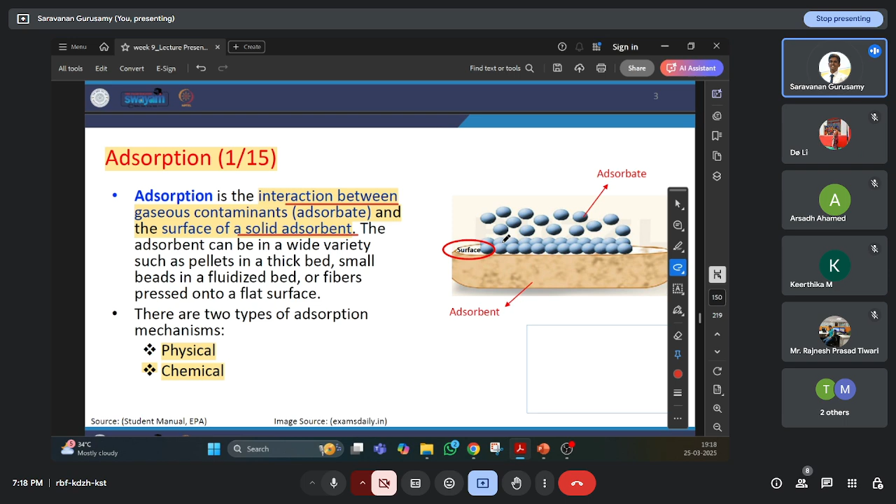So adsorption is an interaction between the gaseous molecule and a solid adsorbent. Adsorption will happen only on the surface. So again, particulate matter was removed only with physical methods - these are all based on chemical methods. There are physical adsorption and chemical adsorption that may also happen.

Physical adsorption is due to weak van der Waals force of intermolecular cohesion, that can be removed easily. But chemical adsorption is due to proper chemical bond between these two particles, solid and gas particles, so this will not be reversible. So as adsorbent, we can use any activated carbon, zeolite, synthetic polymers. Activated carbon is a major adsorbent.

Nowadays cosmetics are all coming with this type of activated carbon for face wash and all. That will remove pollutants because the major point is surface area. Whenever the particle has good surface area, meaning lots of pores means more surface area, that impacts more pollutant removal. So if you're using this as a face wash, lots of pollutant in your face will get absorbed onto this type of activated carbon. Activated charcoal face washes are there.

So zeolite, synthetic polymers, silica gel, activated alumina - these are all adsorbents having higher pore surface area. You can see here surface area plays a major role. Synthetic polymers nowadays have higher surface area, but if you think about mean pore diameter, that also plays a major role in flow. So it should also have more mean pore diameter. You can think about which adsorbent to use for which industry based on your gas characteristics.

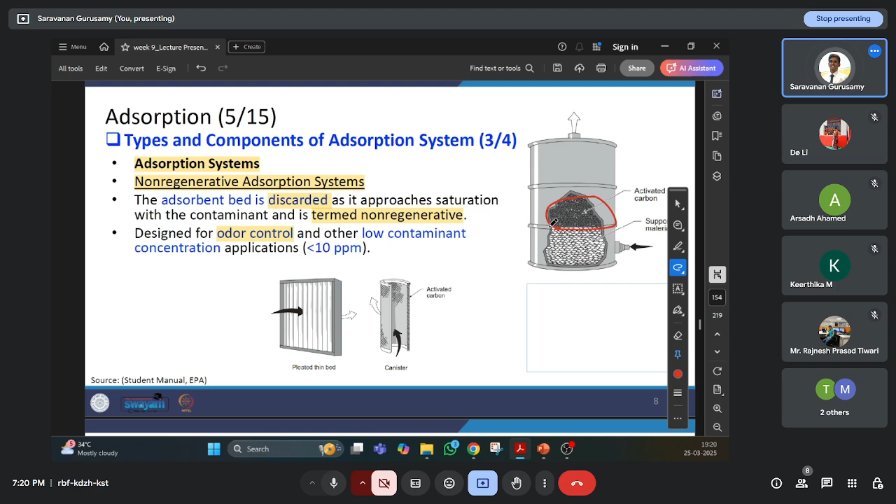Then non-regenerative adsorption system is based on chemical methods. After treatment or after air treatment, you can take the adsorbent and discard it. That is called non-regenerative, used for odor control, low contaminant concentration. But in regenerative adsorption mechanisms, whatever packaged material adsorbent we use, we can reuse it again and again. So for large scale application, we can use this type of thing. How the system works: fixed bed, moving bed, and fluidized bed we can use.

So how is adsorption happening? First, the contaminant comes and gets contact with the surface of the adsorbent. Then it is moving through the pores - that is migration. Then monolayer buildup is forming at the top, and again multilayer. These are all based on isotherms - Freundlich, Langmuir. Langmuir works with monolayer adsorption. Freundlich and BET work with multilayer adsorptions.

Then adsorption forces may be physical and chemical - we have already discussed that, called physisorption and chemisorption. Then for adsorption principles, we have three equilibrium conditions. Equilibrium is whenever the pore size is fully filled - that is called the equilibrium condition. That can be measured with isotherms, isobars, and isosteres.

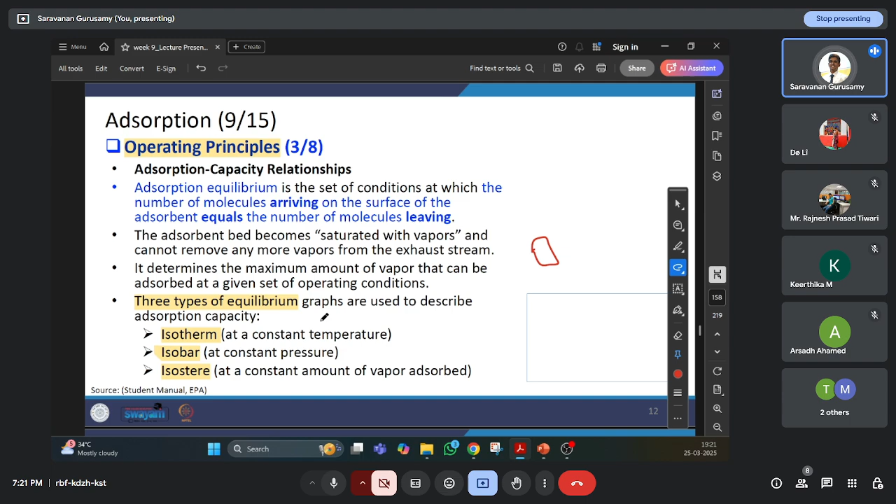Isobars are the plot between temperature and amount of vapor adsorbed, so this is all for vapor pollutant. For a constant pressure, the amount of adsorption decreases with the increase in temperature. For constant pressure, you see how temperature works. These are all based on isotherm, isobars.

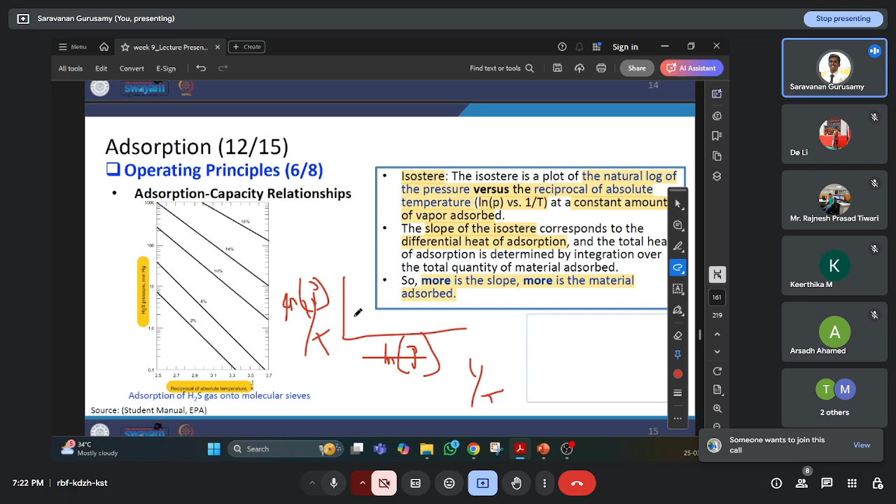Then isostere. Isostere is the graph between natural log of pressure, ln P, versus 1 by T, with 1/T on the x-axis and ln P on the y-axis. You can see 0.1, 10, 100, 1000 on a log scale. The slope of this isostere will give you the differential heat of adsorption. If it is more, then more material will get adsorbed. So these three are the indicators to measure the equilibrium or the efficiency in adsorption.

Then the operating parameter will be your bed depth. Here comes the mass transfer zone, MTZ, which depends on several separate factors - that's the minimum depth required for adsorption. You can't fill just 1 mm of adsorbent, you have to fill 10 centimeters of adsorbent. How do you fix the depth? That's based on the mass transfer zone - that's the bed depth concept.

So to summarize, acid, gas, and organic compounds can be treated for a range of less than 1 ppm, even at 130 Fahrenheit we can use this. Then, absorption.

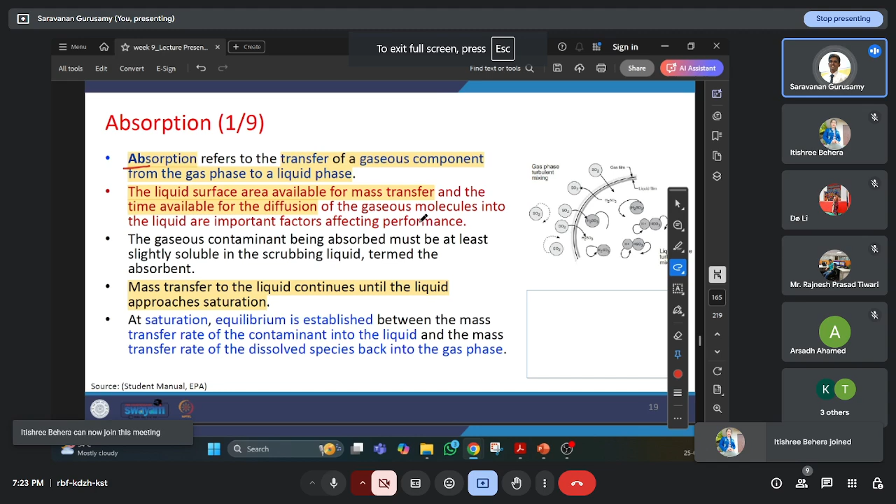Absorption is transfer of gaseous component into liquid phase. Earlier it was adsorption, where gaseous particles, the particulate gases, get adsorbed onto the surface of a solid. Here it will be onto the liquid phase - that's the mass transfer. The time available for diffusion plays a major role.

Different types of absorbers are spray towers, packed bed towers, tray towers, venturi and ejector absorbers. The mechanism here is the gas comes and contacts with the liquid surface and enters into the bulk liquid. Earlier it was gas, but when the liquid phase is there, it transfers from the gas phase to the liquid phase - that's the interface, where it gets transferred.

Then it is entering into the bulk liquid. That's the mechanism, based on Henry's law principle. So again, contaminant reactions, absorbing sizing, and absorber sizing all play a major role here.

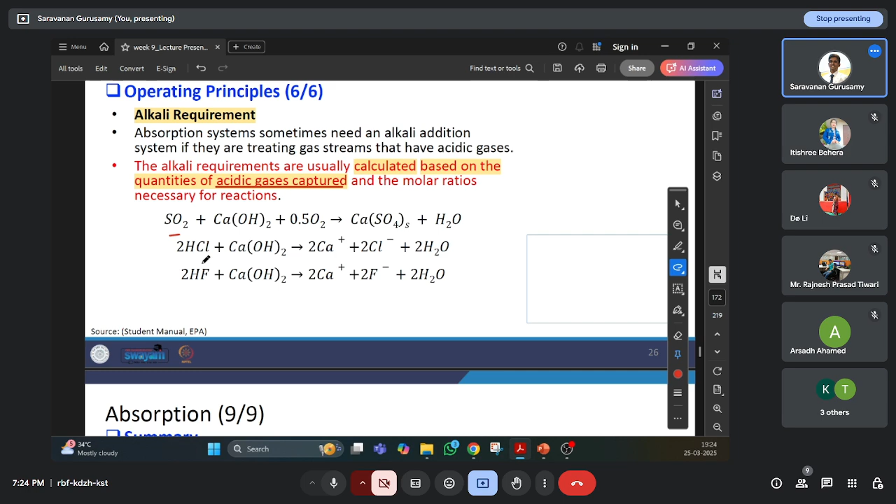And the alkali requirement - why do we need alkali here? It's usually calculated based on the quantity of acid gas captured. So we need to add external alkali to neutralize the water we are using. Water or any moisture or liquid is required for absorption. In the liquid, acid will get created whenever there is sulfur dioxide. So we need to add alkali - we need to calculate how much acid is produced in order to neutralize it, which gives us the alkali requirement.

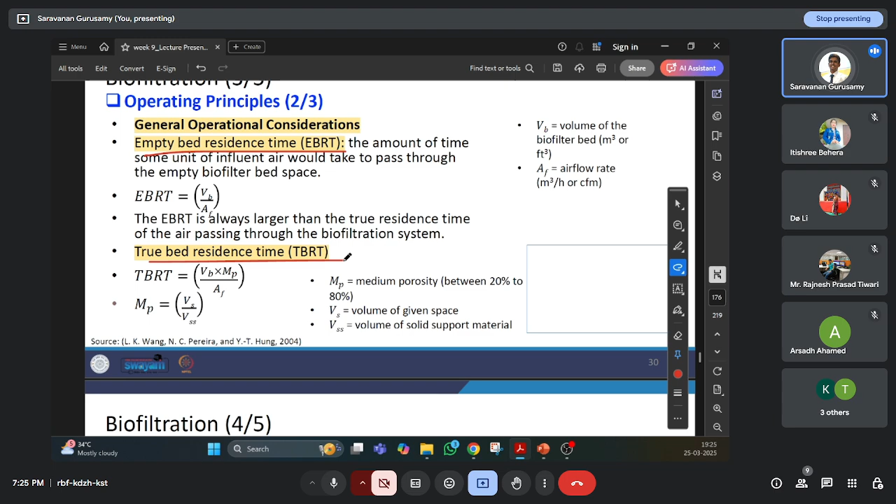Finally, biofiltration. Biofiltration helps remove gaseous air pollutants by microorganism oxidation. The contaminant is metabolized by the organism - meaning it is taken up into its body structure, releasing minor toxic elements like carbon dioxide and water vapor. It's an irreversible process. After absorption into thin water layers, we can use microorganisms to metabolize the dissolved organic compounds, which serve as food for the microorganism. It's measured in grams of pollutant per unit volume per hour, and we can use empty bed residence time or true bed residence time as operating conditions here.

Finally, for gaseous pollutants, after absorption and biofiltration, we can also consider condensation and oxidation. Volatile organic compounds contain carbon and hydrogen, so when oxygen is supplied, they are easily converted into CO2 and H2O, which is less toxic. So volatile organic compounds can be oxidized or condensed, because this may have some value - it can be frozen out and taken as a value-added product. That's condensation. By applying oxidation at high temperature, we get this less toxic pollutant - that's oxidation. So these two are the principles.

All chemical oxidation systems destroy organic compounds in the effluent gas. When economic recovery of the compound is impractical, we can think about incinerating it - destroying a wide range of organic pollutants at high temperature using a gas-based oxidation system or a catalytic oxidation system, similar to what's used in an exhaust engine; the same catalytic oxidation system can be used here.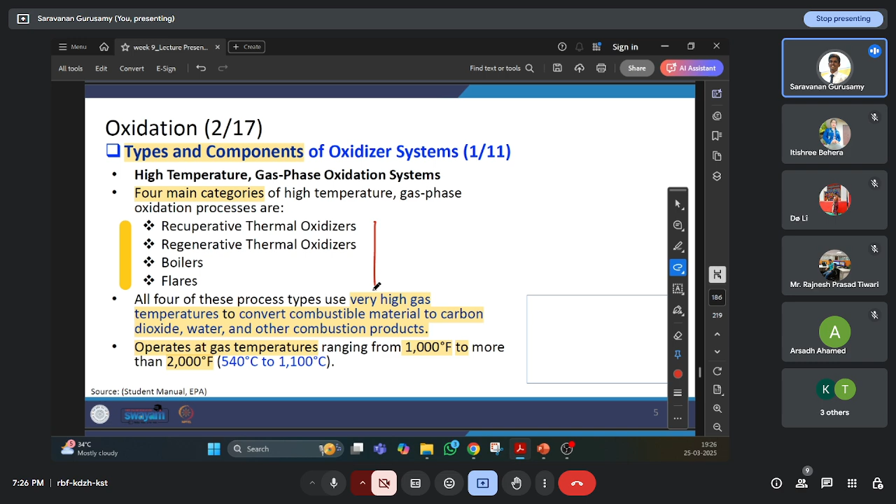We have four major categories: recuperative thermal oxidizers, regenerative thermal oxidizers, boilers, and flares. All four process types use very high gas temperature to convert combustible material, which is hydrocarbons, into carbon dioxide, water, and other combustion products at very high temperature. We can also think about pyrolysis here, around 1000 to 2000 degrees Fahrenheit, or about 540 to 1100 degrees Celsius. Both thermal oxidizers and catalytic oxidizers are used to treat or oxidize the effluent gas. Flares are used primarily to treat emergency vent gases - meaning whatever excess chemicals come out during an emergency can be treated using flares.

Recuperative thermal oxidizers use a tubular and plate exchanger, giving high energy to combust the volatile organic compound. It passes on one side of the tube bundle/tank while the cold inlet gas passes through the other side, collecting the heat produced. Because hydrocarbons produce heat when burned, that heat can be trapped and used again for energy generation, placed back into the same system.

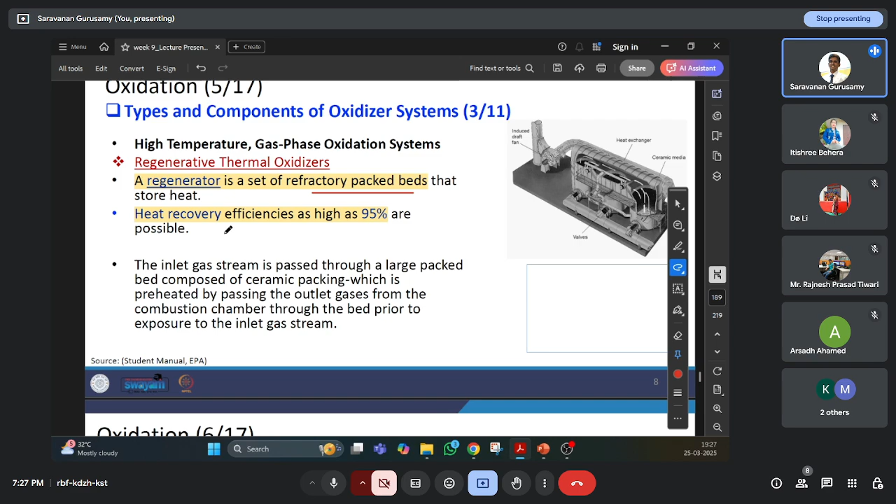In regenerative thermal oxidizers, the regenerator is a set of refractory packed beds, where heat recovery can reach 95% because we are recovering the heat - unlike recuperative systems where there is no recovery. There are three compartments: one is the preheat system, which transfers heat to the combustion, similar to thermal power plants, and finally the purge cycle.

Boilers are an alternative to installing a thermal oxidizer, used to burn the waste stream in an existing plant or process boiler. And finally, flares, as I mentioned, are only used for emergency emission disposal.

Okay, so the factors here are flue gas flow rate, combustion chamber volume, and catalytic properties. Finally, it's the catalytic oxidation system. Depending on which catalyst we use, oxidation can occur at lower temperature and lower oxygen rate. We can use metallic catalysts like palladium or platinum, which accelerate the chemical reaction without changing themselves.

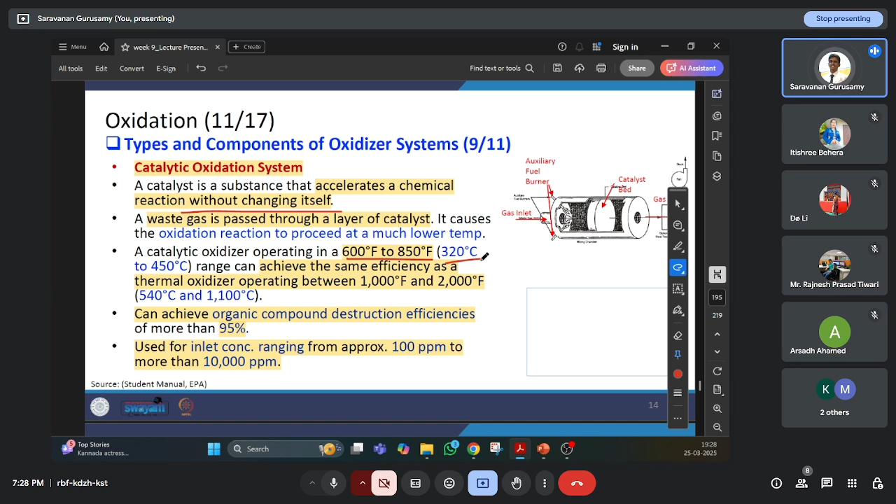So waste gas is passed through a layer of catalyst at even very low temperature. Normally we think about 500 to 1000 degrees, but here we can do this at 300 degrees Celsius itself by using a catalyst, and still get the same efficiency. So we can achieve organic compound destruction efficiency of 95%.

So think about the catalytic conversion technologies. Here the efficiency, the flow, can be calculated by QE, QF, and QD - that is emission stream, natural gas or fuel, and the dilution air we are giving.

So this is the oxidation principle. Whatever hydrocarbon is there, when oxidized, it gives you CO2 and H2O. Whenever N is there, that will come out as N2O or N2. If S is there and fully oxidized, this will come out as SO2. So that's the simple general principle of the reaction.

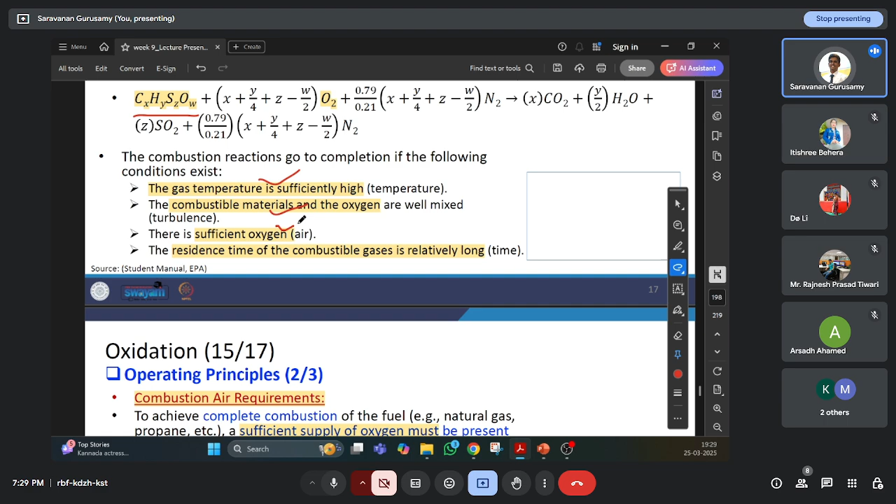That's based on gas temperature, combustible material, sufficient air, and residence time. So this is the kinetics behind that - how much mass transfer is happening. That's based on the catalytic oxidation system.

Final one is condenser. Oxidation will oxidize all the hydrocarbon into CO2 and H2O. But whenever I want this organic matter to recover - why waste the hydrocarbons just to burn and get out? I need this. I can collect this hydrocarbon and use it as a valuable product. So how to collect this? We can use the condensation principle.

Whenever pollutant recovery is required at a moderate to high concentration, we can think about condensation. There are three major categories: conventional refrigeration condensers and cryogenic condensers. These freeze out at lower temperatures, like 5 to 25 degrees Celsius, minus 45 to 100 degrees Celsius, minus 75 to 195 degrees Celsius, even down to minus 200.

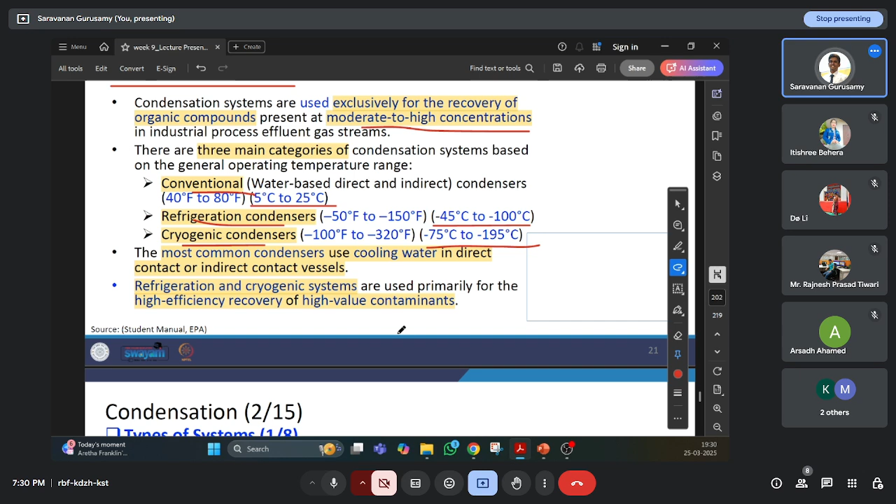So that will freeze out this organic pollutant, and only the gas will escape while the organic pollutant is trapped, collected, and stored for further utilization purposes. It's simple and relatively inexpensive, only requiring very low temperature.

There are two basic systems: direct contact condensers and surface condensers. For direct contact, it's like spraying cool water or coolant, similar to a wet scrubber spray tower - that will spray the coolant, which gets absorbed, condensing the volatile organic matters.

In surface condensers, we make the gas flow through tubes, and from the external side the tubes are cooled. So inside the tubes, the condensed liquid is collected and taken out.

In a refrigeration system, we refrigerate the whole gas, and this heat vaporizes the coolant liquid, which is then compressed to form a vapor stream at high pressure and temperature.

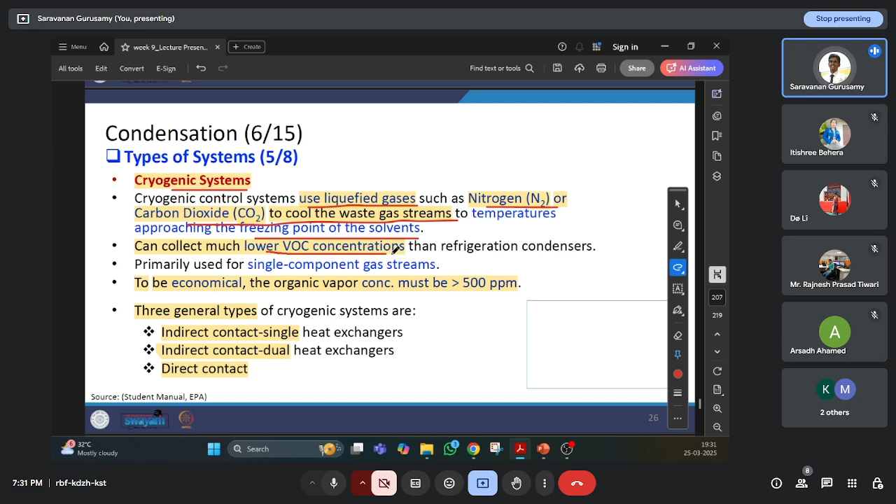Then the cryogenic system uses a liquefied gas like nitrogen or carbon dioxide to cool the waste gas stream, because nitrogen in liquid form is at a very low temperature. Liquid nitrogen or liquid carbon dioxide can be used to reach the freezing point of the solvents. So for lower volatile organic concentration, we can use this type of cryogenic system.

There are again three types: indirect contact single, indirect contact dual, and direct contact - based again on the contact mechanism, to increase efficiency.

The major factor here is condenser heat load, and coolant flow rate. These two are the major operating parameters here.

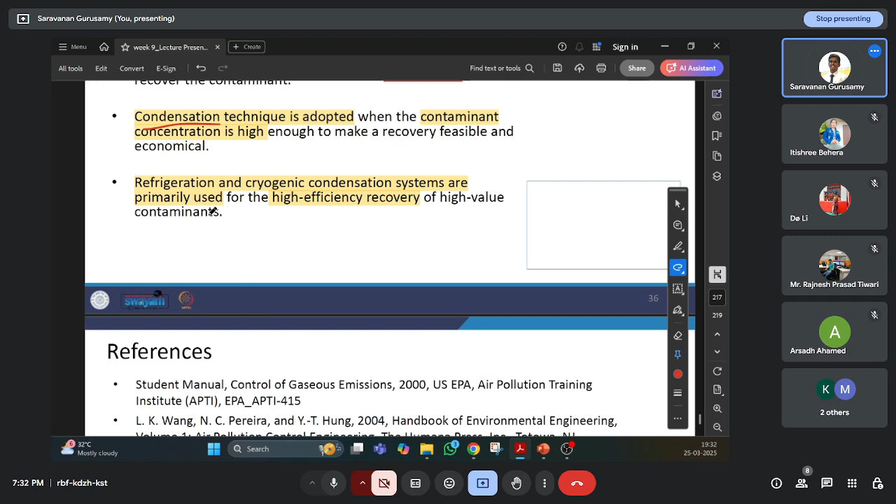So whenever the volatile organic compounds are non-economical to recover, we can easily flare it - that's the oxidation technique. If you want to recover the material, we can think about condensation. The refrigerant and cryogenic condensation systems also have higher efficiency.

So you got it, let me summarize this. We have discussed today about air pollution control devices. In the first lecture we discussed the principles - the basic principles are taken from the natural self-cleansing mechanism of the air. It's based on nature, which was adapted into devices we made. For different sources like moving, stationary, and area sources, we discussed different mechanisms. For particulate matter, we designed 6 devices: gravity settlers, cyclone separators, inertial separators, fabric filters, electrostatic precipitators, and finally wet scrubbers.

For volatile organic compounds, or any gaseous pollutant, we thought of using absorption, adsorption, biofiltration, oxidation, and condensation. These 5 are the major techniques we can use to remove gaseous pollutants.

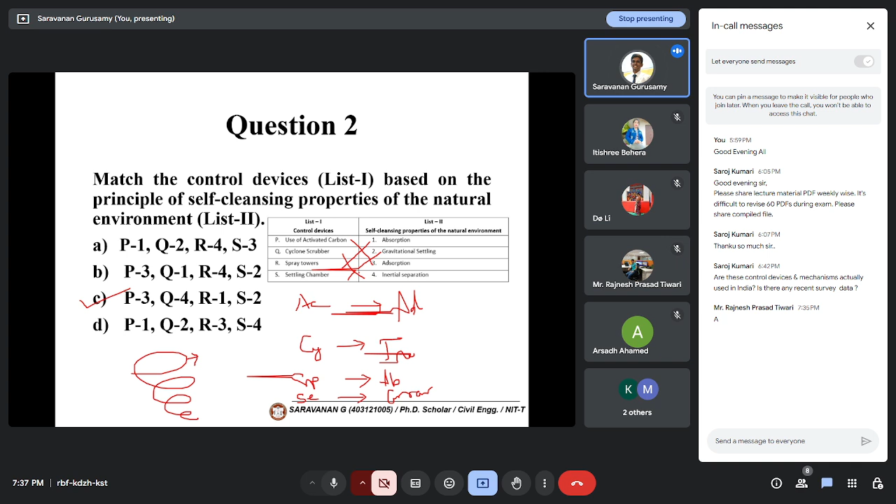P will be 3, Q will be... scrubber is 4. So this is the answer - option C is right. P is 3, Q is 4: spray towers based on absorption, settling chamber based on gravitation. It's correct, so option C is correct. Settling chamber is based on gravity, cyclone separator is based on centrifugal force of inertia, spray towers is based on water absorption or scrubbing, liquid absorption, and activated carbon is based on adsorption.

The third question, please post the answer in the chat box. In which of the following pollutant removal mechanisms is the gas allowed to flow in a circular path which causes the particle to impact on the outer periphery of the device? We enter in a tangential motion and it follows a circular path, with the pollutant getting inertially impacted on the periphery of the device.

There's a tank on the periphery of the device where it gets impacted and removed. What is this called - gravity settling, centrifugal impaction, electrostatic attraction, or Brownian diffusion? They're asking about the mechanism, or you can say the device name. The principle is circular motion itself, which is called centrifugal impaction - option B. The device is called a cyclone separator, which uses centrifugal force that drives the suspended particle onto the wall. Option B is correct.

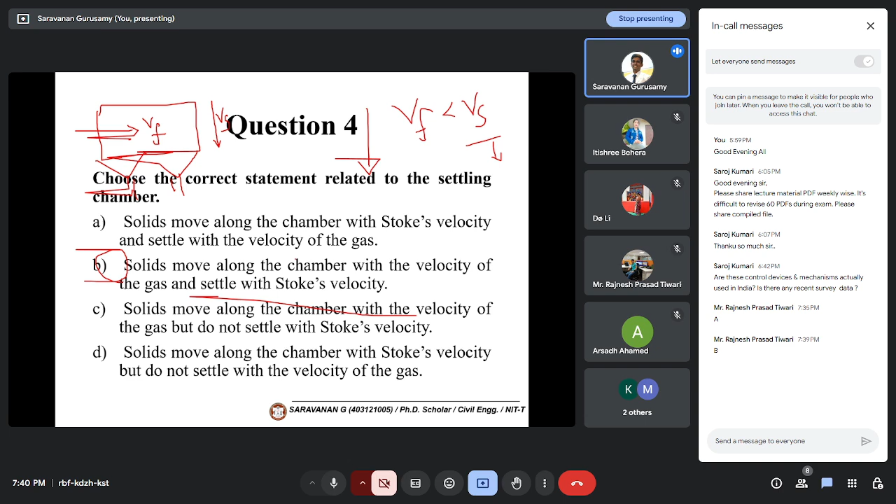Solids move along the chamber with the flow velocity and settle with the Stokes velocity, right? So which option is correct? Solids move along the chamber with the velocity of gas and settle with the Stokes velocity. Option B is correct.

Here you can see the settling time is same. That's why we have: solids move along the chamber with the velocity of the gas and settle with the Stokes velocity. This is Vf, this is Vs.

So the fifth question: in which of the following control devices is flue gas passed through a tightly woven or felted fabric? It's a fabric, causing particulates in the flue gas to be collected on the fabric by sieving and other mechanisms. So again, sieving only - like a fabric means it will be woven.

So within these pores, the gas is getting released, and the particle is getting absorbed, filtered. So it's called a fabric filter, and this mechanism is called filtration. Because of the size, because of the impaction, it's getting filtered out - that's called filters. Tightly woven fabrics are used, or any material like polypropylene or glass fiber. Different materials can be used, not only woven fabrics. That's the mechanism of filters.

B, filter bags - yeah, correct. So they are asking for the mechanism, so it's a filter. If it's a device, then it's called a filter bag, or a filter house, or baghouse. So it's a tightly woven or felted fabric, and particulates are collected by sieving and other mechanisms.

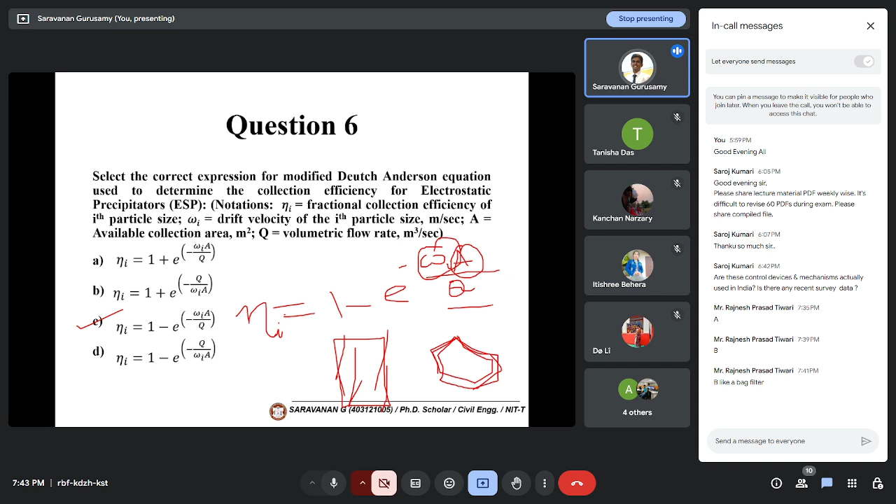A is the available collection area in the electrostatic precipitator - there is a plate, so this is the whole collection area. If it is a tube type, the whole tube is the collection area. That's why if we increase the collection area, we get more efficiency - that's why they change it from plate to tube. And Q is the volumetric flow rate, so C is correct.

So ESP, that's electrostatic precipitator. Efficiency eta equals 1 minus e power minus - if it's the modified equation, i refers to the ith particle.

Okay, seventh question: which of the following... Yes ma'am, you raised a question - okay, it's wrongly stated. They are asking which defines the plot of natural log of pressure versus reciprocal of absolute temperature, at a constant amount of vapor adsorbed, for establishing the adsorption capacity relation.

For establishing the adsorption capacity or equilibrium, we have three definitions: isotherm, isobar, and isostere. Isotherm is the one at a constant temperature - what is the efficiency or collection at different pressures? Whenever the pressure increases, the adsorption increases. That's what the graph says.

Isobar is the one at a constant pressure - if the temperature changes, what happens? The adsorption will get decreased whenever the temperature increases. But isostere is the one which gives the graph between 1 by temperature, that's the reciprocal of temperature, versus ln of pressure.

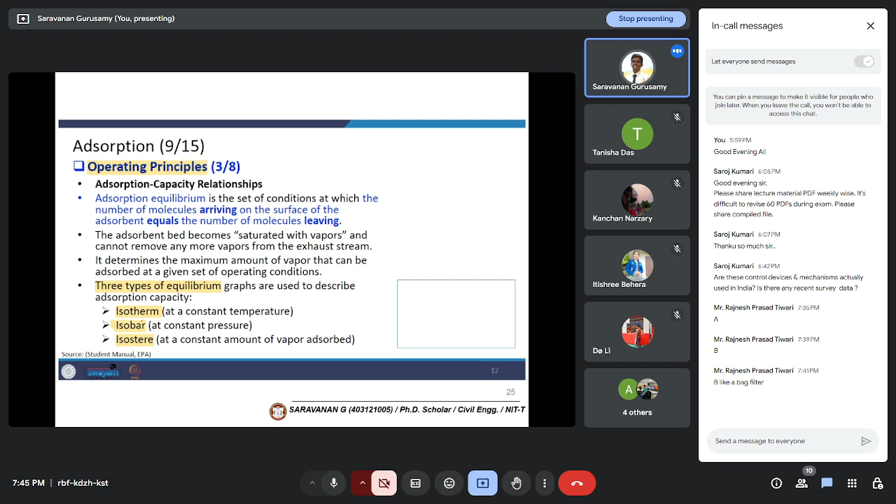So that is called isostere, and that will give you a proper temperature or capacity at which the adsorbent is getting equilibrium. The question asks about the plot between ln of pressure and 1 by T, reciprocal of absolute temperature - that's called isostere. Isotherm is at constant temperature, how pressure varies. The third one, isostere, shows ln of pressure versus 1 by T. So the answer is isostere.

Next question: the type of force involved in physical adsorption, which are electrostatic in nature. There are two types of adsorption, physical and chemical. For physical adsorption, the force involved is a weak van der Waals force. For chemical adsorption, it's a chemical force - a covalent bond will be formed. So physical adsorption is electrostatic in nature, based on weak van der Waals force.

Again, it's an electrostatic force only, a weak force. Like when you rub paper on your head and try to pick up another paper - that's electrostatic force, it will not last for a long time. So it's a weak van der Waals force. But if it's a chemical reaction forming a covalent bond, it will always be irreversible. So here they are asking about physical adsorption - that's the van der Waals force, due to weaker van der Waals intermolecular cohesion.

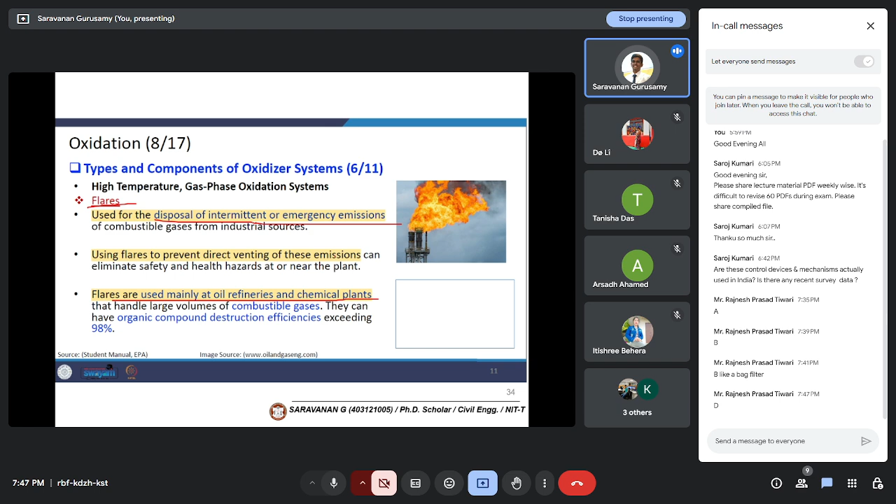Ninth question: which of the following high temperature gas phase oxidation processes is used primarily to treat emergency vent gases? We have four oxidation mechanisms: recuperative thermal oxidizers, regenerative thermal oxidizers, boilers, and flares. In gas phase oxidation, emergency vent gas can be treated by flares - they are used in oil and chemical plants to dispose of intermittent or emergency emissions. So option D is correct.

So the last question, 10th question: which technique is adopted when the contaminant concentration is high enough to make recovery feasible or economical? Whenever a volatile organic compound or gas pollutant needs to be removed, it can be handled by five methods: absorption, adsorption, biofiltration, oxidation, and condensation. When there's high concentration of VOCs and I want to recover it economically instead of wasting it, which method should I choose? The options are biofiltration, isotherm, condensation, and absorption.

Condensation will give you the recovered product, so option C is correct because it will freeze out the product that can be taken out, instead of simply oxidizing and flaring it to convert into CO2, which is no use. If it's less concentration, we can do that; but if it's high concentration, we can try recovering and reusing it. So option C, condensation, is correct.

Condensation is exclusively used for recovery of organic compounds when they are present in moderate to high concentration in industrial effluent gas. We can use three types: conventional, having lesser temperature; refrigerant, having more lesser temperature, minus 45 to minus 100; and cryogenic, which uses minus 75 to minus 195.

So that's it about today. We have discussed the major portion of this air pollution control subject, like air pollution control devices for particulate matter and organic gases. Hope you have enjoyed the session.